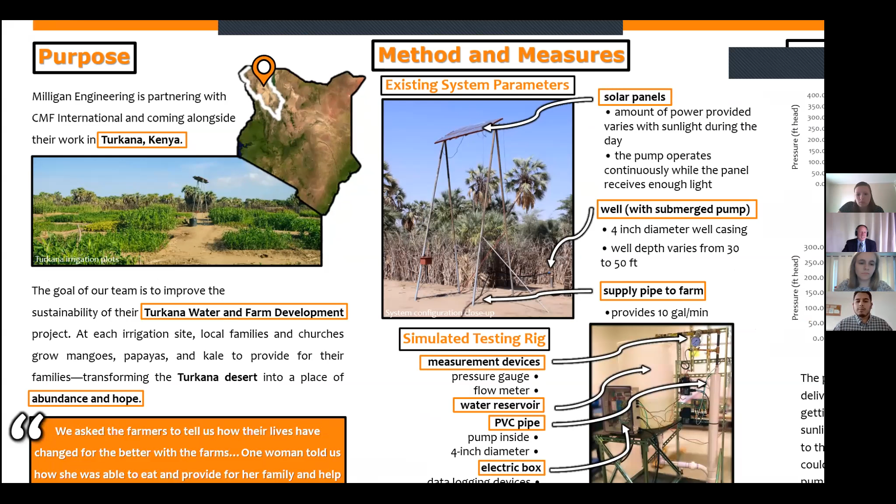CMF International is a global mission team at work in 25 countries. They're creating Christ-centered communities. CMF International's projects are wide-ranging and multidisciplinary. Because of this, it allowed us to implement our engineering studies to help a community in Kenya. Their mission in Turkana, Kenya centers around spreading the gospel by aiding the community in their efforts to maintain a sustainable garden in a region with very little rainfall.

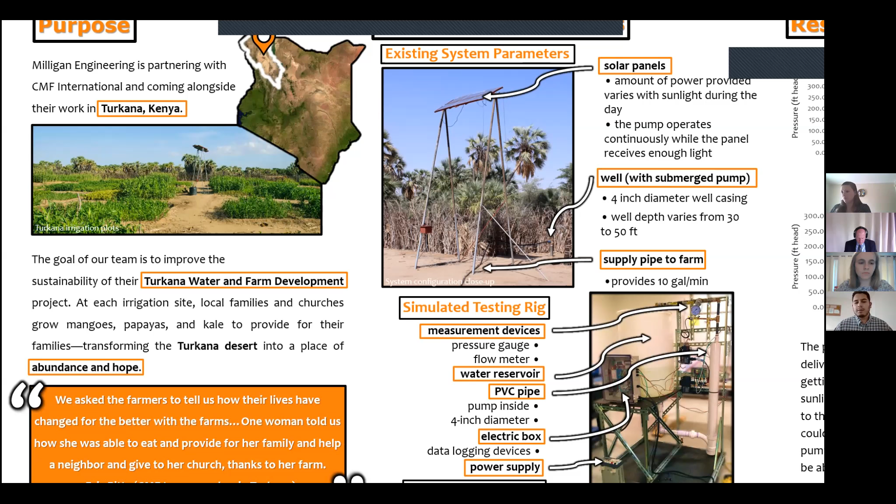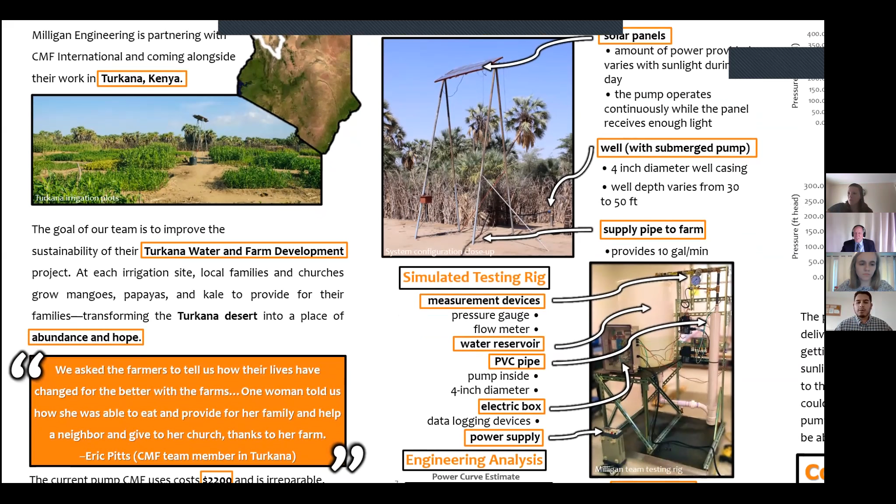At each irrigation site, local families and churches grow vegetables and fruits like mango, papayas, and kale, etc., to provide for their families. The community garden has had a tremendous impact on the people of the community. In our partnership with CMF International, the goal of our team is to improve the sustainability of their Turkana water and farm development project. This goal entails identifying sustainability problems with their current irrigation equipment, proposing a solution, testing the possible solution, and ultimately providing a report to CMF International with data and recommendations.

Their current irrigation system consists of solar panels that power a direct current submersible pump. Gene Morden, CMF International member, brought to our attention that the current system has room for improvement. To start, the current pump used in all Turkana wells costs approximately $2,200 each, which is very expensive in comparison to other pumping options. Also, the current pump is not repairable. Repair parts are not manufactured for the model.

Finally, because of the operating conditions, the intermittent supply of power, and the continuous run times, the pumps in the system have been experiencing a shortened lifespan. It has been documented that approximately 12 pumps out of 100 have experienced a lifespan of less than 10 years. Therefore, our project focuses around providing a pump recommendation that is sustainable, repairable, and financially viable.

For this project, we determined that an alternating current pump is a more affordable option. We found 2 alternating current pumps that could possibly fit the needs of the community, be less expensive at approximately $300 and $500, and perform in their specific irrigation system. The 2 pumps were purchased and tested. The following test criteria were considered in providing a recommendation for CMF International.

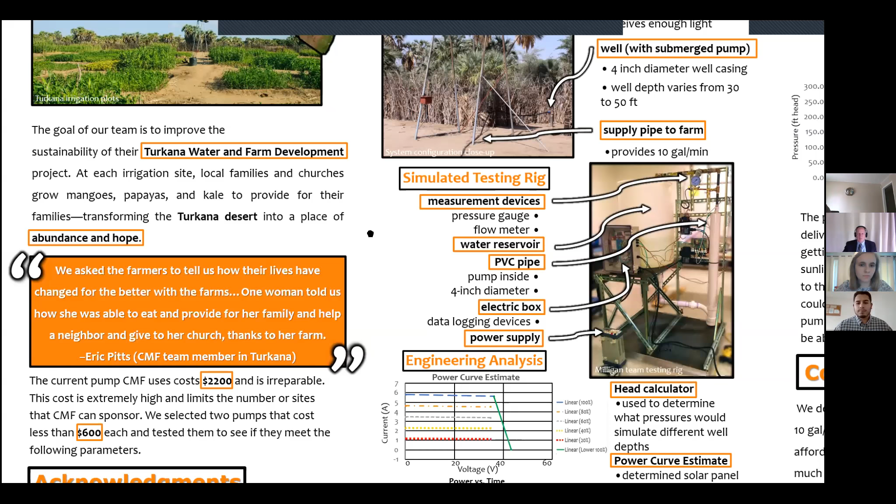In order to determine the pump selection, we first needed to have a full understanding of the current system. The system as installed by CMF contains a solar panel section to provide power for the pump. This usually contains 2 solar panels. The panels are mounted on a stand that allows them to pivot. They're manually adjusted by members of the community throughout the day so that they can track the sun. The amount of power provided varies with the sunlight throughout the day.

One thing CMF mentioned to us is they choose not to utilize a battery storage system, mainly because the cost upfront is significant and it does add some complexity to the system. There is also no power switch on the solar panels, which means that they provide power continuously to the pump as they receive sunlight. This was one area of concern as it shows the pump receiving continuous low power prior to startup in the hours just after sunrise, and then as the sun's going down, again, it's the low power situation.

The pump is contained in a 4-inch well casing. The well depth can vary based on location, but usually it will range from 30 to 50 feet deep. The pump is submerged in the well and provides approximately 10 gallons of water per minute to the farms by pumping through a 1 1/4 inch water line.

The water lines from the pump to the crop also vary in length. We were informed by our CMF contact that the longest length installed was approximately 700 feet. This water is then pumped directly onto the crops. The workers at the crops can allow the water to fill a specific area, and then they're able to just manually move those water lines to ensure sufficient irrigation to different areas of the crop.

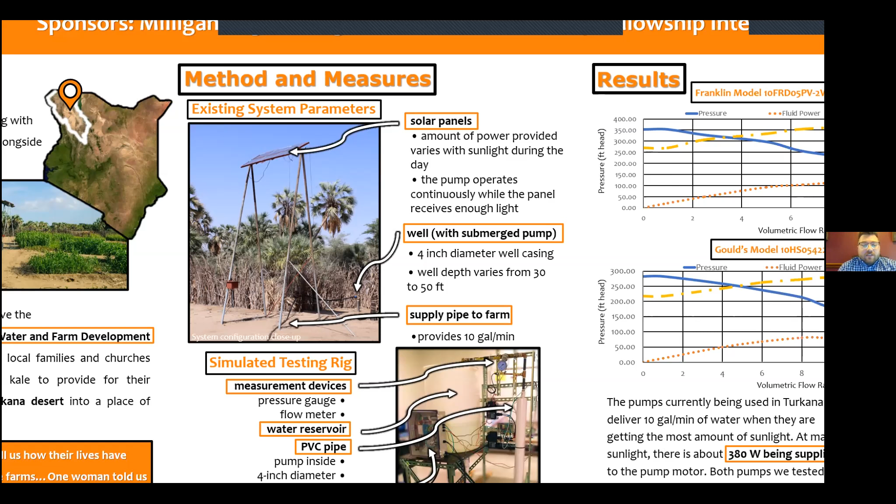For proper measurement data, it required us to assemble a testing rig that would allow us to simulate the characteristics of the current system in operation. A power supply would be utilized in place of the solar panels. This would allow the power provided to the pump to be varied, similar to the power that would be provided by the solar panels as the sun changes position during the day.

Additionally, due to the selection of alternating current pumps rather than the DC pumps that they had previously used, inverters were added to the system that would allow the conversion of DC power provided from the solar panels to AC power, which was required for the pumps. The well casing was modeled using a 4-inch PVC pipe that the pump could be submerged in. This also required a 55-gallon plastic barrel to be used as a water reservoir to ensure the pump had sufficient flow and would not run out of water.

The pump outlet contains a pressure gauge followed by a valve. The valve can be manually adjusted until a desired pressure value is met on the pressure gauge. This allows a simulation of the pressure lost from the system. Parameters such as well depth and pipe length would affect that pressure loss. After the valve, there is a flow meter that allows us to verify the flow after the pressure losses to ensure that the flow is capable of meeting the 10-gallon per minute requirement that the current irrigation system was producing.

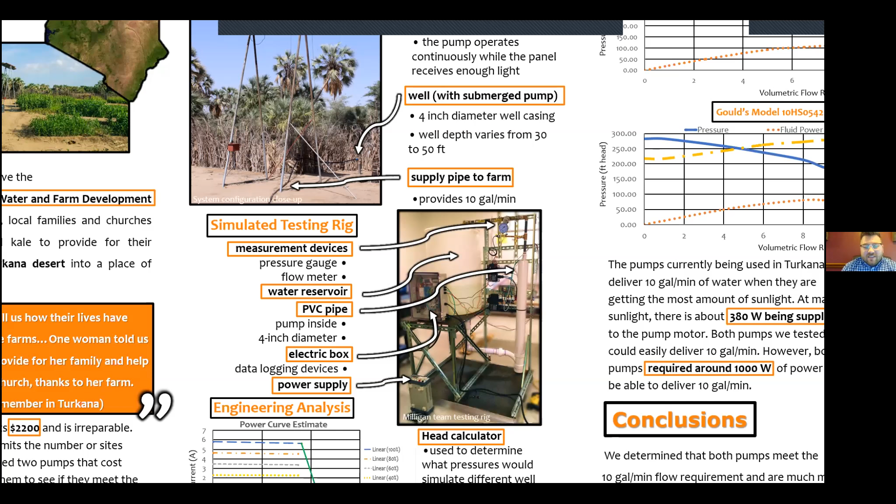This data could be logged on devices located in the electric box, which is attached towards the front of the testing rig. By utilization of this data logging, it allows the parameters to be monitored for a given time to determine that steady state has been reached, and the data could be viewed as reliable.

Next is the engineering analysis. There were multiple things we had to do for that. The first one, more for the mechanical side of the project, was the head calculator. The head calculator represents the pressure loss through the system. It is an Excel calculator that was built to allow the system parameters mentioned previously, such as well depth and pipe length, to be input and the pressure loss of the system to be calculated. This pressure is then what would be used for testing by manually adjusting the valve on the pump outlet of the test rig.

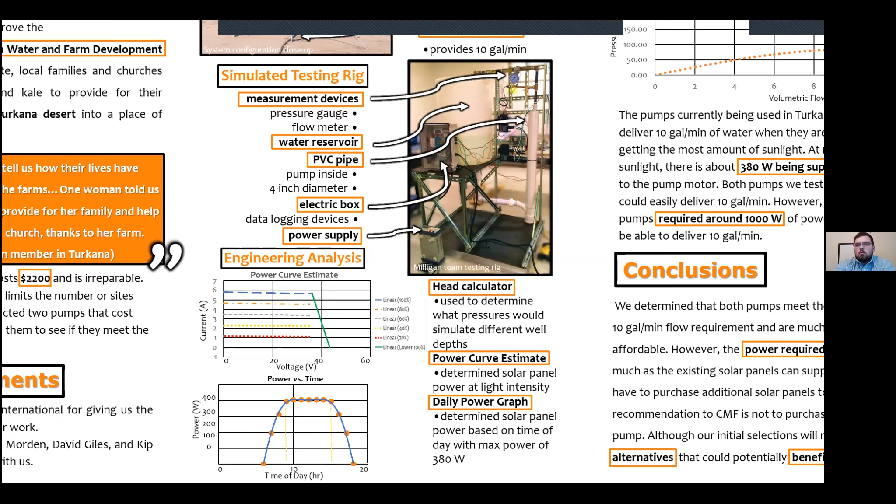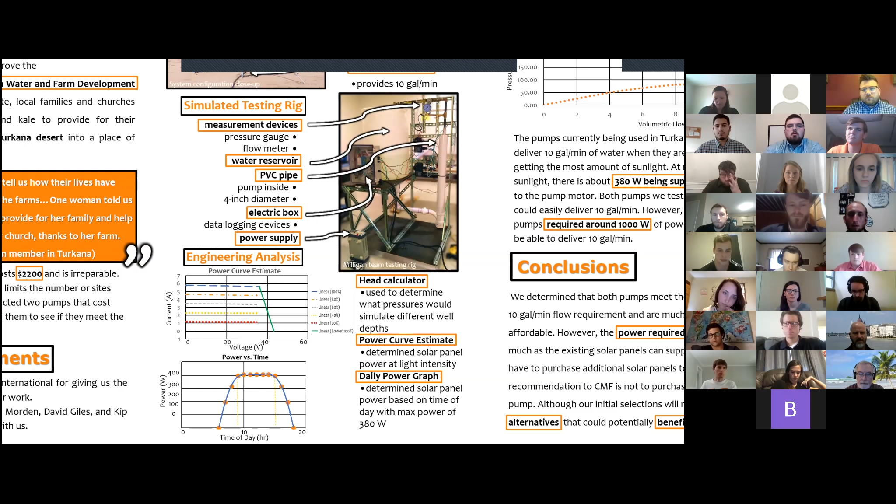Next comes more of the electrical analysis that had to be done. The first is a power curve. A power curve is a graph that shows how the voltage, current, and power change depending on how much sun is seen by the solar panels. This is typically something that is given to you by the manufacturer, but these panels, having come from Kenya, we didn't have much data on them. So we had to create them through analysis and the data we did have. These curves can be used to determine the true power generated throughout the day.

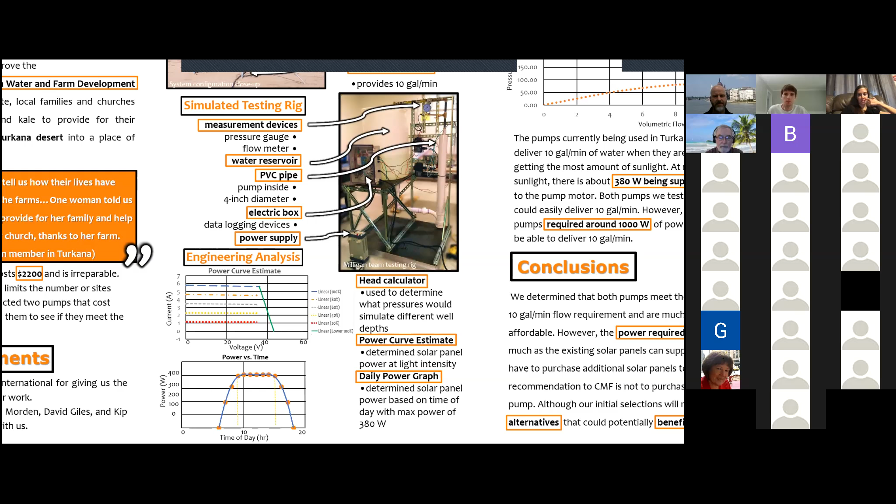The graph on the top left is the power curve estimate, and the different lines on the graph show the different percentages of sunlight on the panel. As you can see, the lower the percent of sunlight, the lower the current and power produced by the panel. So as you go down the graph, the different colors represent less solar irradiance seen by the panels.

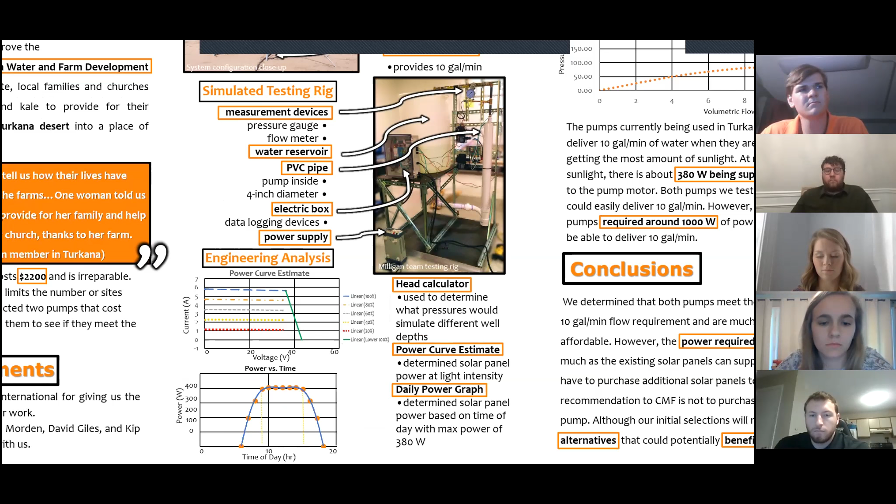The next part of the analysis we did was the power versus time. The power curve estimate gives you just any generic amount of solar irradiation on the panels to give you your power. So what we did is we created a power curve specific to Turkana, Kenya. The power curves give you the way the panels react to the sun.

So in order to get the power versus time, we had to use the latitude of Turkana, Kenya to estimate the position of the sun throughout the day. We used this to determine when the pump should start pumping water and to prevent future startup problems.

The graph shows that the panel starts seeing sunlight around sunrise, which is around 6 a.m. in Turkana, and it takes about 3 hours for the pumps to reach peak power, which is around 380 watts. They see this for roughly 7 hours a day, and then it decreases until sunset.

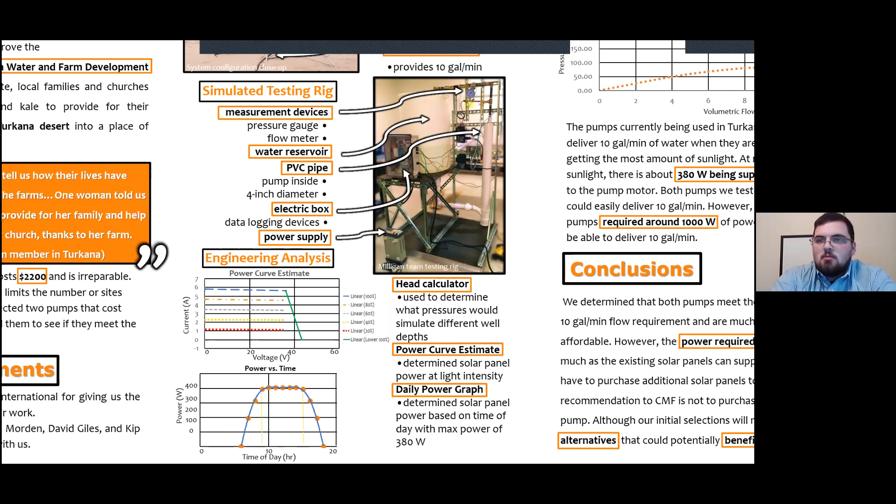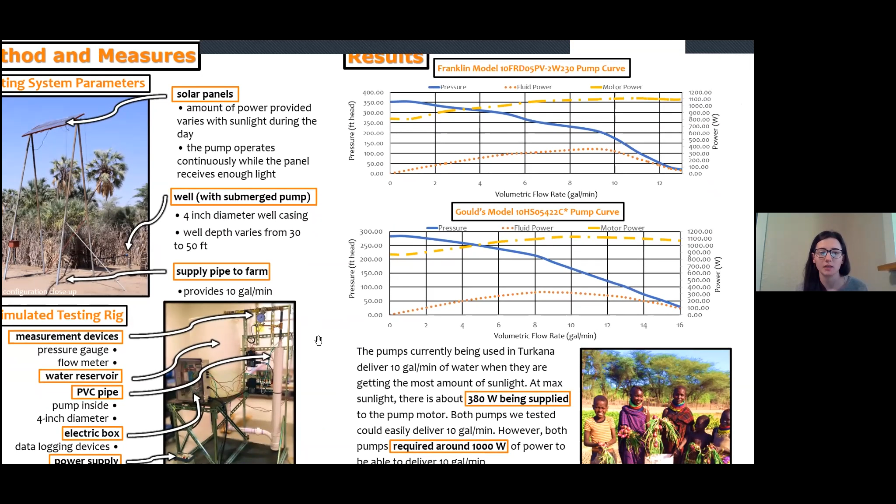So after testing both pumps, we created 2 standard pump curves to better understand the characteristics of each pump. The yellow dotted line along the top of each graph represents the amount of power the pump motors are drawing as the flow rate is increased. The orange dotted lines are the amount of fluid power that can be produced by the pumps as you increase the flow rate. And then the blue lines are a function of pressure and flow rate, and they represent how much flow the pumps can produce depending on the depth of the well that they are placed.

So we first wanted to make sure that for a 30 to 50 foot well, which is typical in Turkana, we'd be able to provide 10 gallons per minute of flow. Both of these pumps easily provided that much flow for much deeper wells, so we were very satisfied with these results. However, each pump required about 1,000 watts of power at almost any well depth and flow rate. This is way more power than the 2 solar panels currently being used in Turkana would be able to provide.

Looking at the graphs, you can see that the yellow dotted line, like I said, shows how much power is required by the pump motors, and the orange dotted line shows how much power is actually turned into fluid power. The difference between these 2 curves shows how much power is lost through motor and pump inefficiencies. The fact that these 2 lines are so far apart tells us that neither of these pumps was very efficient. We would hope to see pumps like this be about 60% efficient, and both of these pumps maxed out at about 30% efficient.

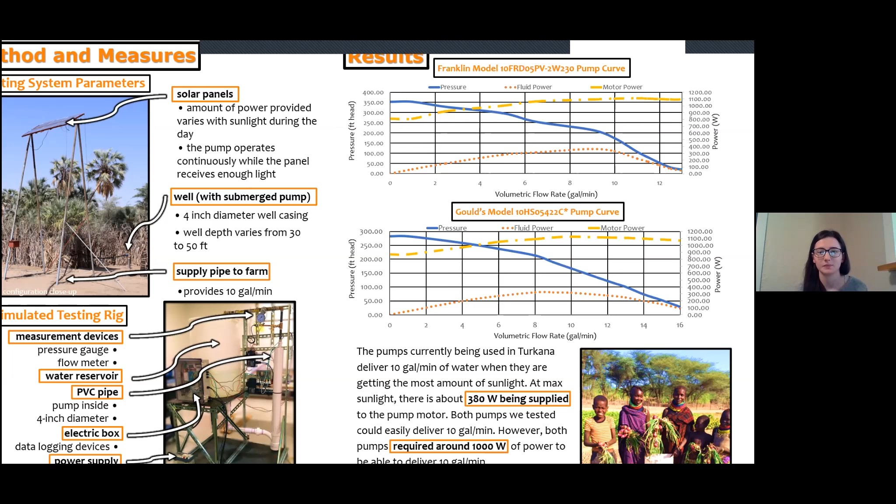So it's evident from the results of our testing that neither of the initial pumps we selected are viable options for CMF's work in Turkana. Although both pumps are much more affordable and they can meet the flow requirement of 10 gallons per minute, they require more than double the power used by the current pump, like Sarah explained. Since the existing panels can only provide 380 watts of power, in order to actually use either of these pumps, CMF would have to purchase additional solar panels for each irrigation site. The cost of these extra panels would effectively cancel out the economic benefits of the lower pump prices. Therefore, our recommendation to CMF is to not purchase either of these pumps.

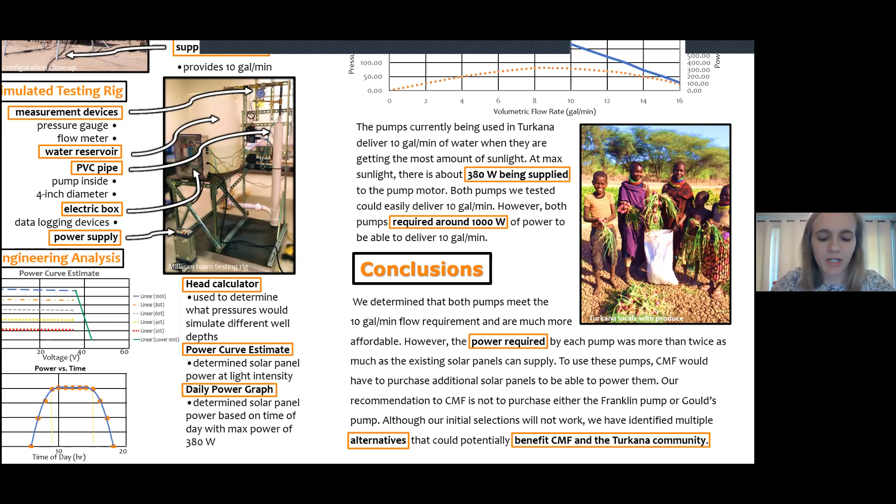However, by testing these pumps, not only did we gain experience with the importance of testing and verification in the process of engineering selection, but also, moving forward in our partnership with CMF, we have a better idea of realistic pump requirements for their systems and have identified multiple alternatives that can benefit CMF's work and help them reach even more people in Turkana.

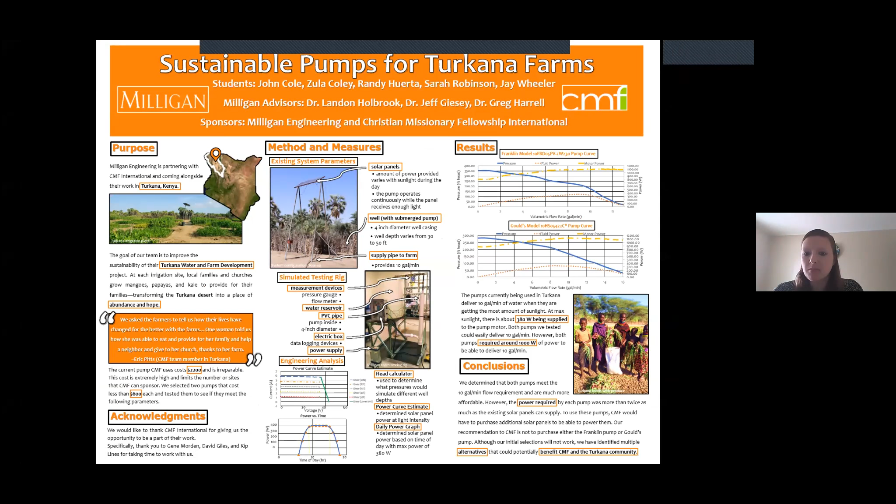Does one have to be trained to use or fix this system, or can you just send a manual with instructions? So the people that are already in Turkana and using these systems are trained in how they work. The only thing that would be different with our system is that since we've included inverters, since we're using an alternating current pump, we would have to write some kind of instructions for them. And then we would also want to include all the manuals that come with the inverters and pumps.

And then we would also be available for any questions that they have. We have connections with multiple CMF members, so they can send us an email and we'd be able to help them in any way we can.

Our second question comes from Drake. Is there any purification with this system?

No, there's not. So none of this water is going to be used for drinking. These pumps are purely to irrigate the crops. So there's no purification aspect for this system.

I have another question. Based on your recommendation of not purchasing either of these two pumps, what is your recommendation, knowing that their current way of doing this isn't very sustainable on many different levels? What should they do?

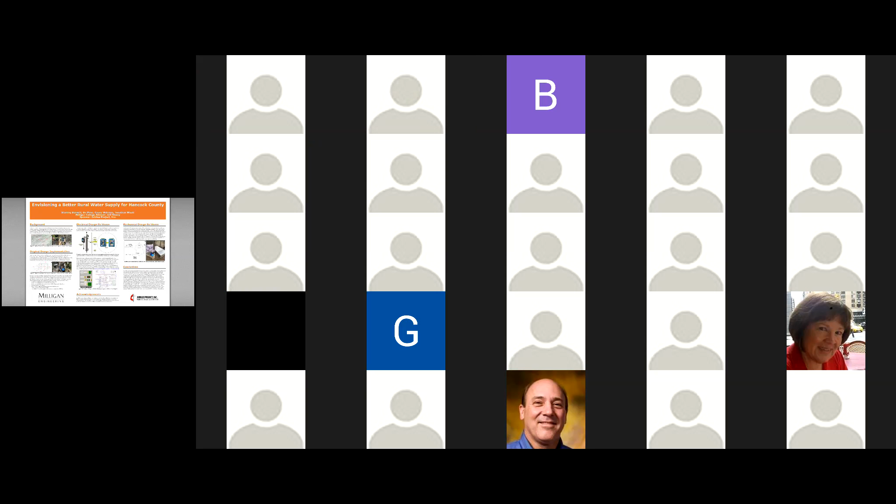Casey Williams and Jonathan Wyatt, under the mentorship of Dr. Jeff Giesey, have been working on this project for the last couple years, and they're going to tell us tonight about their rural water supply solutions for Hancock County. It's all yours, guys.

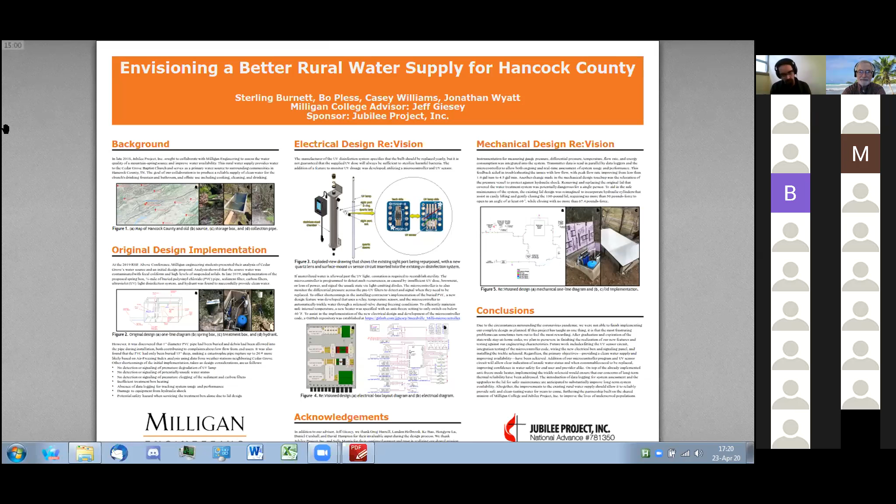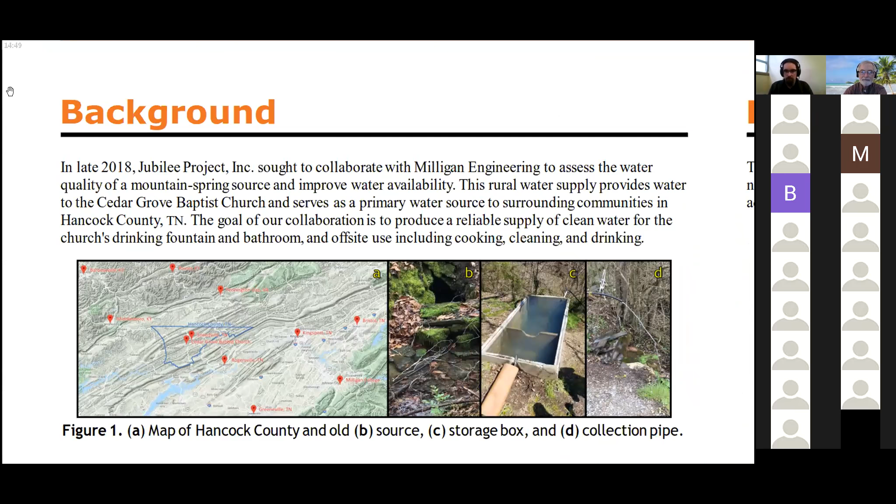Well, good afternoon, everyone. And on behalf of the group, let me thank you all for being here, and congratulate everyone else who's presenting today on a fantastic job. As we mentioned a few minutes ago, the theme of this year's conference is revision. And so we'd like to take an opportunity here to tell you about how we've spent this year using some innovative design to improve an old project.

Hancock County is outlined here in Figure 1A in blue. And for reference, Milligan College is over here about 1.5 hours to the southeast. And all across the county, there are several mountain springs that serve as water sources for the citizens of the region. And one particular spring, which is shown here in Figure 1B, provides water to the Cedar Grove Baptist Church, as well as to surrounding communities.

Originally, water ran downhill from this spring about 1/4 mile, and it was carried by black plastic tubing. It flowed down the hill into a concrete box, which was just outside of the church, and then further downhill before being dispensed beside the nearest road. And Jubilee Project, which is a local ministry organization, partnered with Milligan Engineering in late 2018 to assess the safety and availability of water coming from this source.

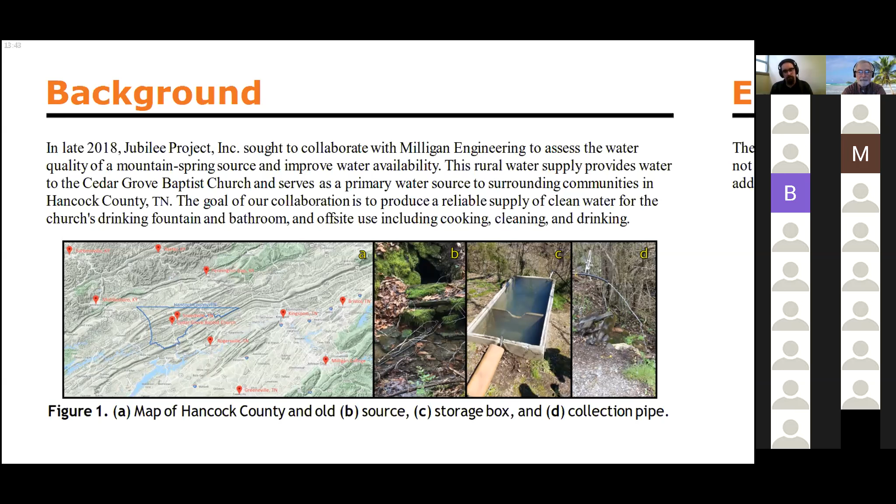From that analysis, it was determined that the water was contaminated with fecal coliforms and also contained high levels of suspended solids, which are both conditions that make water unsafe to drink. In addition to this, the piping that was used to transmit the water was subject to frequent freezing during the winter months, which made the supply of water very, very unreliable.

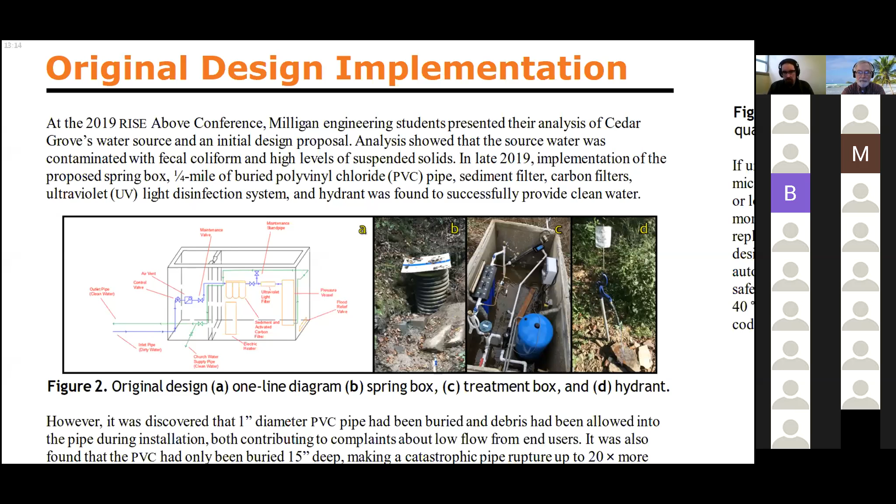By the end of 2019, a design had been developed and implemented that you see here, and it fixed these issues. Figure 2B is a cover for the spring itself that prevents contamination at the source. Sediment and activated carbon filters were implemented to remove solids. A UV light system sanitized the water to remove microbiological growth, and burial of a 1 1/4 inch PVC pipe with a freeze-proof hydrant attached at the distribution point was able to solve the issue of freezing.

However, the design ran into some problems rather quickly. It was discovered that 1-inch PVC pipe had been buried rather than the specified 1 1/4, and this limited the flow capacity of the system fairly significantly. We also found that the pipe was buried to a depth of only 15 inches instead of the originally intended 30.

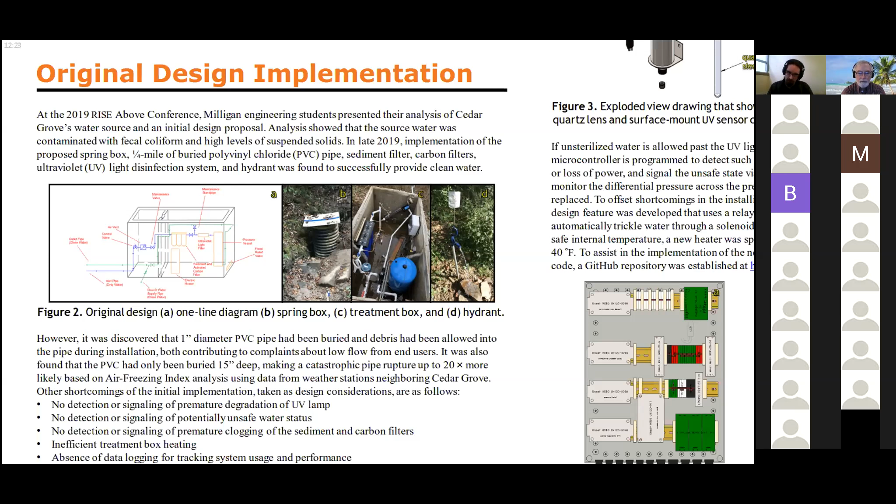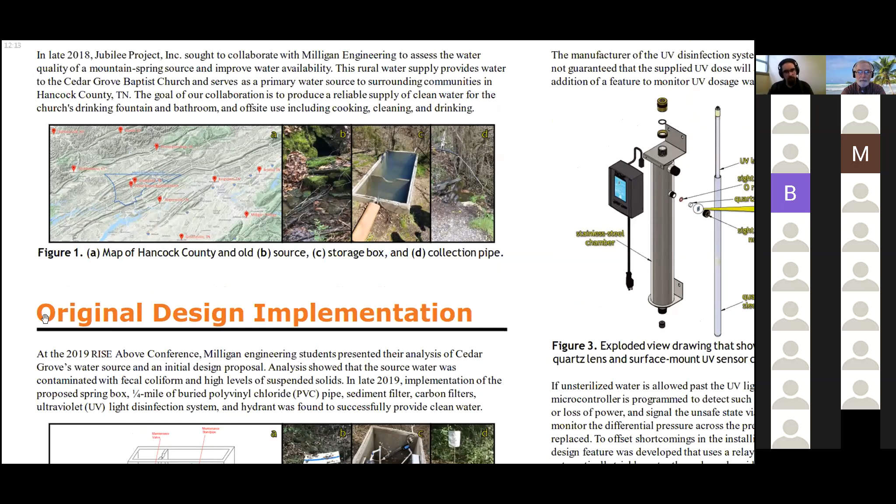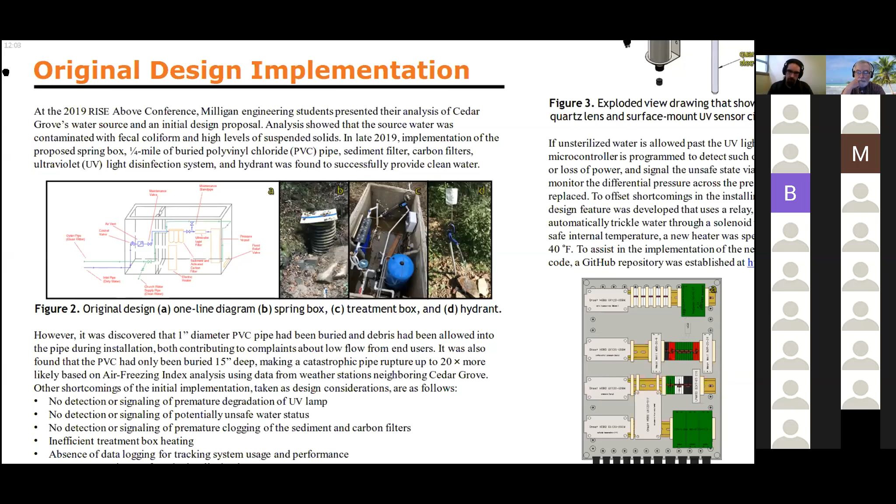And after conducting an air freezing index analysis based on weather station data from the surrounding area, which you can see here in figure 1A if we scroll up just a little bit. So all of these red points are weather stations that we use to compare to Sneedville. And from this analysis, we determined that the burial depth being half of what it originally was made a catastrophic rupture due to freezing in the system up to 20 times more likely. So in other words, we were taken from well over a 100-year freeze with the original design to just a 5 to 10-year freeze.

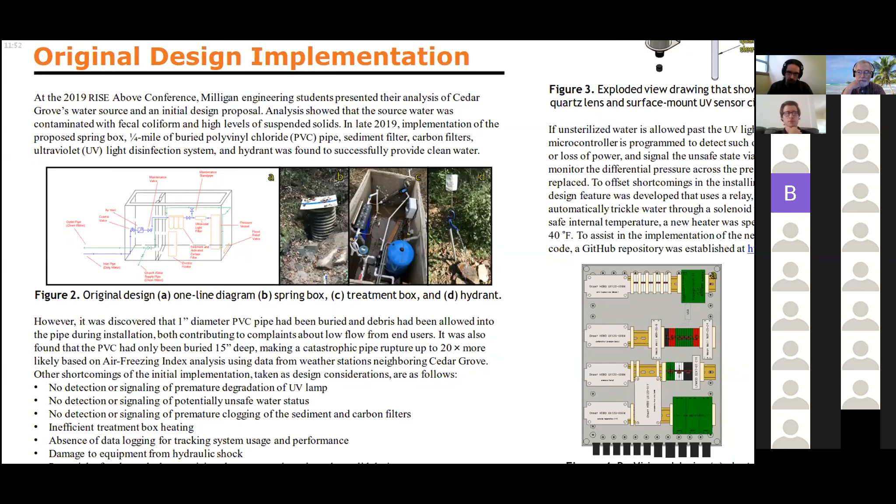And in addition to all of these, there were several more areas for improvement. The original design didn't offer us a way to detect if the system was powered or if our UV light and particulate filters were operating as intended or if they needed to be replaced. The interior of the concrete box, which is here in figure C, it had been repurposed as a home for our treatment equipment, and it had insufficient heating for winter temperatures, so the piping inside of the box was susceptible to freezing.

We had also incorporated a pressure vessel in the original design, both for water storage and as a means to protect our system from sudden pressure surges. And upon further analysis, we determined that this was located incorrectly within the system and was going to need to be repositioned. We lacked a method that was reliable for getting performance and usage data that would allow us to know how well the system was doing its job and how much people in the community were using the system to get water.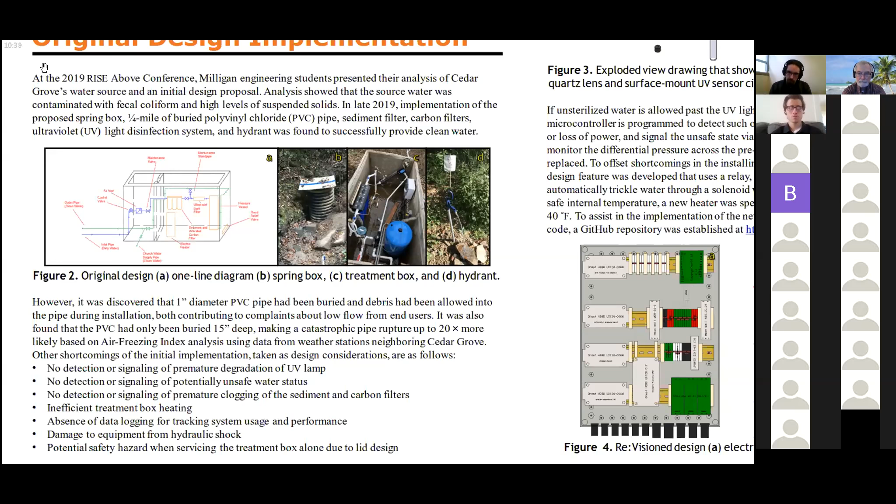And lastly, opening the lid on the concrete box to get access to the equipment, to do maintenance or to add new equipment, became a 2 or 3 person job to move the lid just because of the weight and the shape of the lid itself. And so we knew that the core of our design was strong, but we also felt really strongly that we could do a lot better. And that was what motivated our work this year. And so with that said, we'd like to tell you how we've been able to improve the system so far.

Okay, I'm just going to dive right into the electrical, so buckle up. The carbon filters and sediment filter and UV lamp all need to be replaced periodically, which you do according to manufacturer recommendation. And this doesn't guarantee that those pieces of equipment are going to be providing clean water for their entire lifetime. It's just kind of an average lifetime that they found. So one of our toughest challenges was to ensure that we always have safe water for the entire lifetime of the consumables. And so we tackled the issue by implementing a UV sensor and a microcontroller.

So we use the UV sensor to monitor the UV dosage in real time and then signal whenever it's below a certain threshold, indicating that it needs to be replaced. So we could end up increasing the lifetime of the UV lamps, but it'll also make sure that if they ever go bad early, that we'll be sure to know.

As you can see in figure 3, we were able to implement this by repurposing the existing sight port on the UV system, which is on the side. And normally the sight port just allows you to see that the UV lamp is operating, and it has a UV blocking lens. So by replacing that with a quartz lens that allows the UV through, the light can get to the sensor and we can tell what type of dosage the water is receiving.

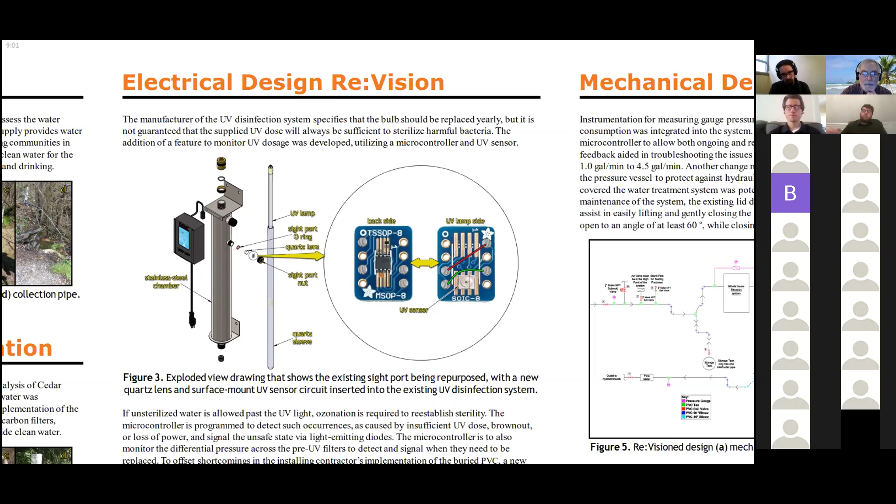So due to our choice of using the UV for disinfection, there's no residual disinfecting agent that's left in the water. And so we have to keep the UV light on all the time. And if there's ever unsafe water that gets past the UV light, there's no way to treat it before the end user gets it. And that bacteria will also stick to the pipes and grow over time.

So we decided it was necessary to supplement the disinfection by using an ozone generator, and ozone can also kill bacteria. And so the ozone will sterilize the downstream pipe, and so long as unsafe water doesn't re-enter, then it should be a safe water system. But the problem is that there's several different ways that the unsafe water could get past the UV, including if there was insufficient UV dose before the light was replaced, if there was a brownout, or if there's a total loss of power.

So the microcontroller helps to implement and signal when one of these situations arises. We also use the microcontroller to monitor the differential pressure across the carbon filters and sediment filters, which helps us know when they need to be replaced instead of just doing it every 6 months.

Another aspect we looked at electrically was the insufficient bury depth of the pipe, which drastically increased the risk of freezing. Our solution was to implement a solenoid valve that can open or close based on temperature sensor readings from the microcontroller, so we can auto-trickle water through the system, which drastically improves tolerance to prolonged freezing temperatures.

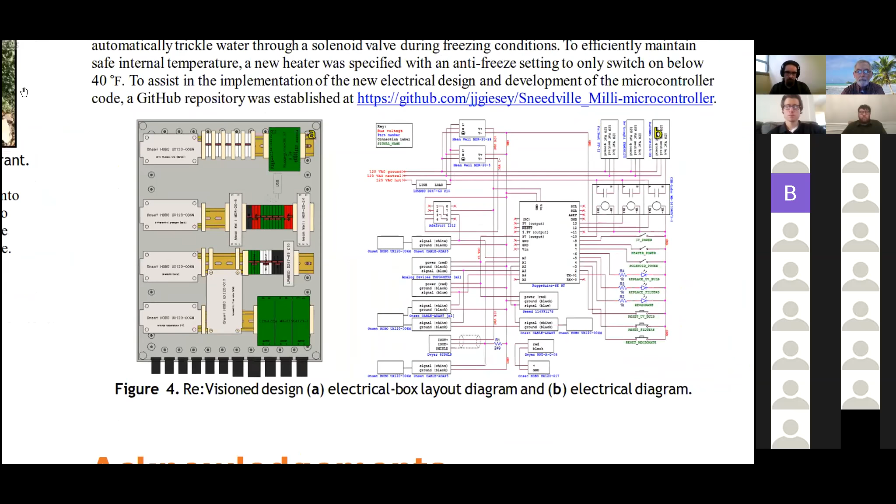And lastly, to assist in implementing the new electrical design and developing the microcontroller code, I made a GitHub repository to establish these diagrams so they can be maintained and improved in the future. It also helps to understand what's going on in the system, because as you can see, they're pretty complicated diagrams that require a lot of explanation.

So there's a lot of crossover between mechanical and electrical design aspects. For instance, the instruments that monitor mechanical design performance also read into our microcontroller and make decisions on what our system is going to do based on that. I'd like to hand over the reins to Sterling to continue discussing the mechanical design considerations.

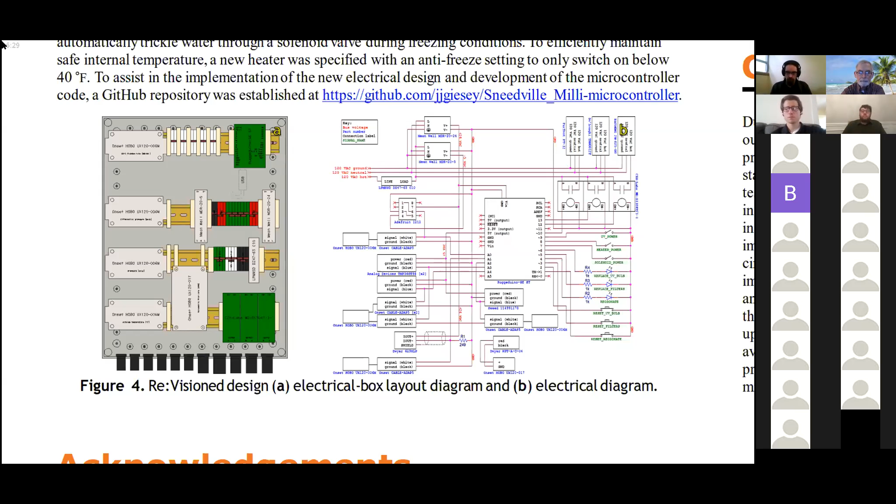There we go. All right.

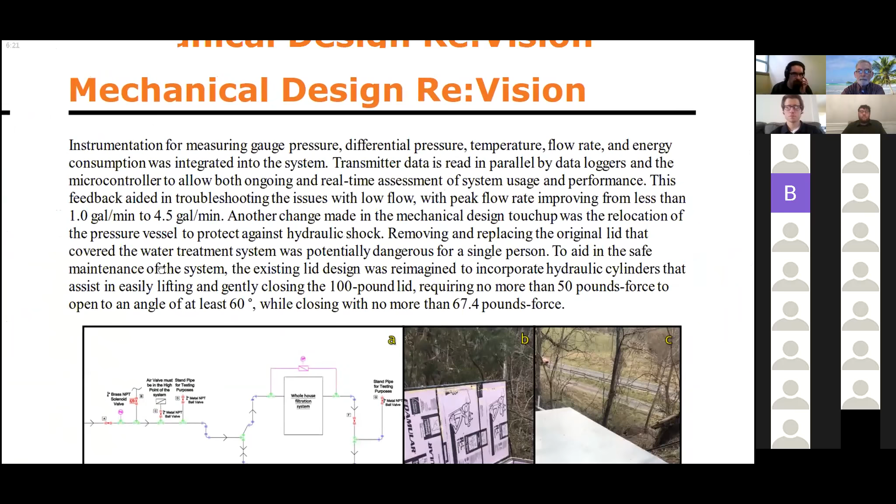Thanks, Giesey. When it came to revisioning the mechanical side of this project, we added many instruments to read and collect data. A pressure gauge was used to track the pressure of the water within the system. We used a differential pressure gauge to detect pressure drop across the large debris and carbon filters to ensure they're working properly all the time.

And we also used a flow rate reader, which is currently being used right now to track the system's water output and usage. There's also a couple other instruments being used to track the amount of energy used in the system as well.

So during this project, there were two pre-existing issues that Bo kind of hit on. One came in the form of a large boulder that had pinched and cracked the line near the spring box after it was placed on top of the PVC line. So after breaking up and removing this some 500-odd pound boulder, we replaced the line at that location.

And then after that, we found there were rocks within the line causing a blockage, in one of the PVC couplings that was underground, only 15 inches. So after removing these two issues, we were able to greatly increase the flow rate from about 1 gallon a minute to 4.5 gallons a minute.

With this new information, the storage tank wasn't really needed for storage so much, but it was still very important to use as a pressure vessel to protect the UV light from water hammer coming from the upstream line in case of sudden water stop at the outlet. So it was repurposed and moved downstream, before the UV light.

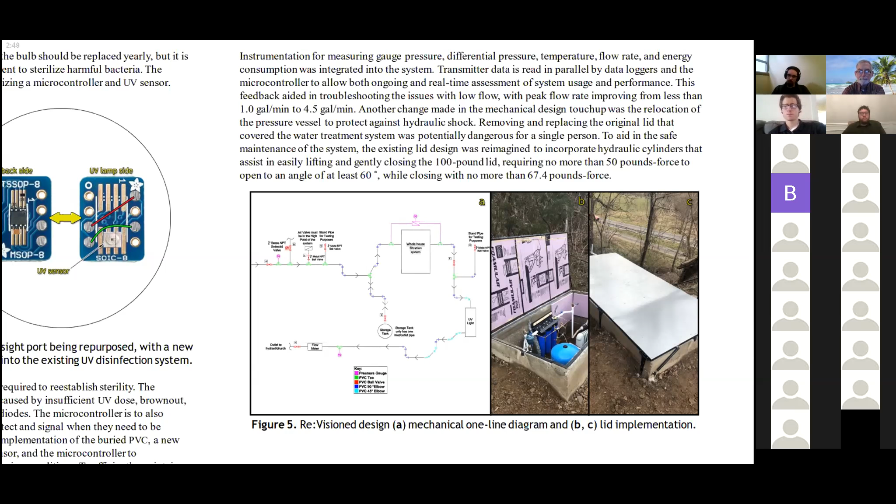And then lastly, the angle of the lid — when it came to the gas struts, we wanted about 60 degrees or so so that our tallest member could stand up in the box and work on the instruments and adjust things as needed. But during the implementation of the lid, we were able to open it all the way to 90 degrees, which gave us a lot more room to work in that space to fix or adjust things. So with that, I'll let Jonathan take care of the conclusions.

All right, thank you, Sterling. So based on everything my colleagues have mentioned today, we ran into our fair share of complications with this project. Anything that could have gone wrong did, or at least it felt that way. Some of these were self-inflicted, while others were out of our control.

Regardless, all of those complications came with their own teaching aspects and moments of humility. These taught us that even the most frustrating problems can be the most rewarding. Even now, the circumstances surrounding the coronavirus pandemic have caused us not to be able to finish implementing our complete design as planned. However, the primary objectives of providing clean water supply and improving availability have been achieved.

For our future work, it includes fitting the UV sensor circuit, integration of a microcontroller code, wiring the new electrical box and signaling panel, along with installation of the trickle solenoid.

The addition of the UV sensor and microcontroller will allow for a clear indication of when the water is reaching unsafe drinking conditions, as well as when consumables such as the filters and the UV light itself need to be replaced. These design additions will allow for improved confidence in water safety for not only the provider, but also the end user.

The implementation of the trickle solenoid, in conjunction with the anti-freeze heater that is already installed, would ensure that our concerns of long-term thermal reliability have been addressed.

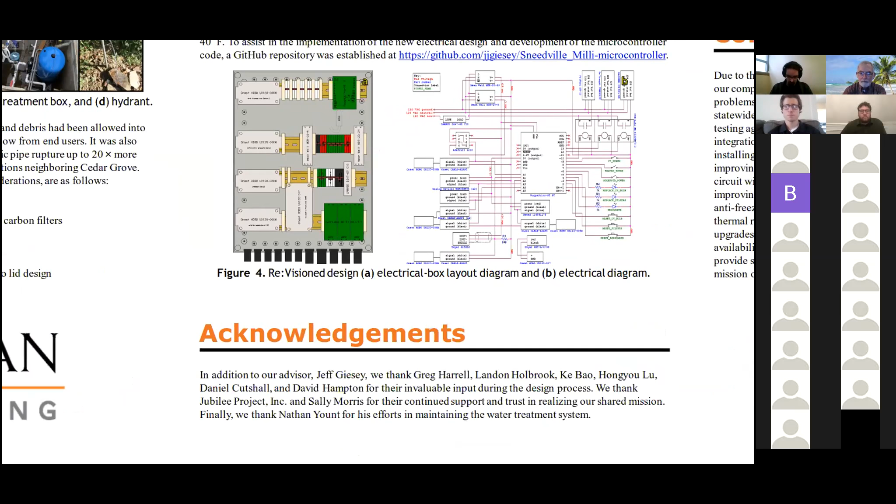Thank you guys very much. I have one comment from Dr. Carolyn Carter here that I'll read off to you. She says, Milton and I were involved with hosting the regional CTE, Career and Technology Education Teachers, on campus on March 12th. One of those faculty members was from Hancock County. Her church was the church where this team did their work. She was beyond ecstatic with the work this team did and was very appreciative of their work.

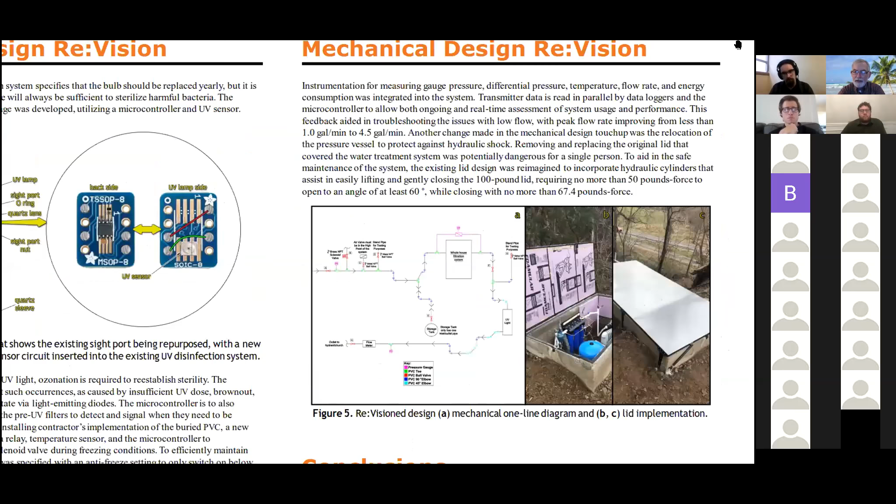I know it's a long distance where this pipe is being run down to the supply. Is it feasible, in your opinion, to cover the pipe over? I know digging it out, you don't know whether there are rocks underneath. And although you didn't say it, it was a contractor issue, it wasn't your fault on this. Would it be feasible to cover it over or insulate it in some way to lessen the likelihood of freezing?

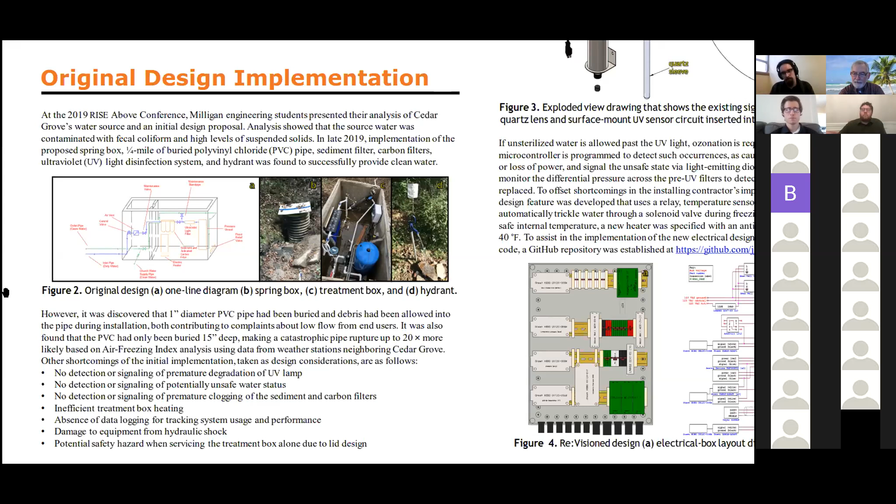I would say that in theory, I think it would be feasible. In practice, it would be a very, very big job. The distance is not so much the issue as it is the terrain. You can sort of see from the first picture of the spring, it's not the sort of place you could drive to if you didn't have four-wheel drive, or something rugged to get back into that wooded section. So in the future, if that burial depth presents serious issues, and if the powers that be decide they'd rather pursue that than attempting to rebury the pipe deeper, I think it's possible, but ultimately the financial cost and labor involved, just because of where it's located, would be fairly substantial.

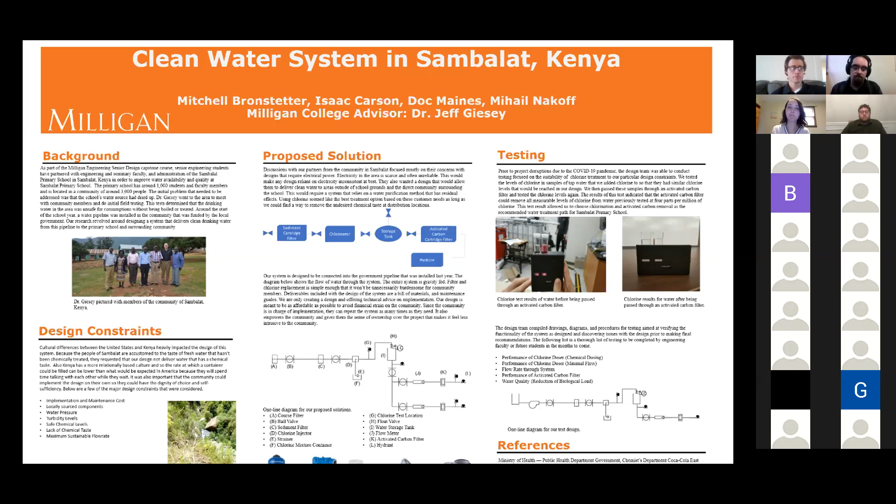First, I want to say thank you and say great job to the first two projects. It's been really cool working alongside them and seeing all the progress that they've made. I want to also thank everyone for taking the time out of their day to come and listen and see the work that we've done this year.

For our senior design project, Isaac, Doc, Mihail, and myself have been working on a clean water system in Sambalat, Kenya. For some background information...

Last year, Dr. Yola reached out to Dr. Giesey about possibly helping out with a water system in Kenya. Dr. Giesey took a trip to Sambalat, Kenya, in the picture below, and found out that the water source had dried up. This was used by the primary school there, which had about 1,000 students and faculty members, and the school is also located in a community of around 3,000 people. At the beginning of the school year, a new locally funded pipeline was introduced to the community.

This pipeline would provide water to the community, but during field testing, it showed that the water was contaminated. The water had microbiological contamination in it. The water from the source had to be boiled before consumption, and this can be an exhausting process for lots of members of the community. So oftentimes people won't boil the water and will just drink it from the source. This can cause sickness to children and adults. So having clean water here is something that can really be overlooked and something we really wanted to help with.

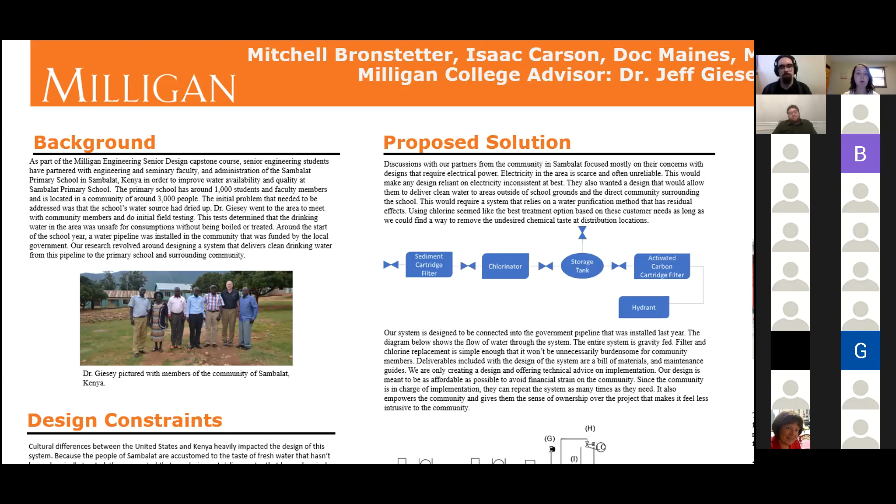As Milligan engineering students, we partnered with Milligan and some seminary faculty and the administration of the Sambalat Primary School to help improve the water availability and quality. In our research, it revolved around designing a system that delivers clean drinking water from the pipeline to the primary school and surrounding community. Doc is going to explain the design constraints we had.

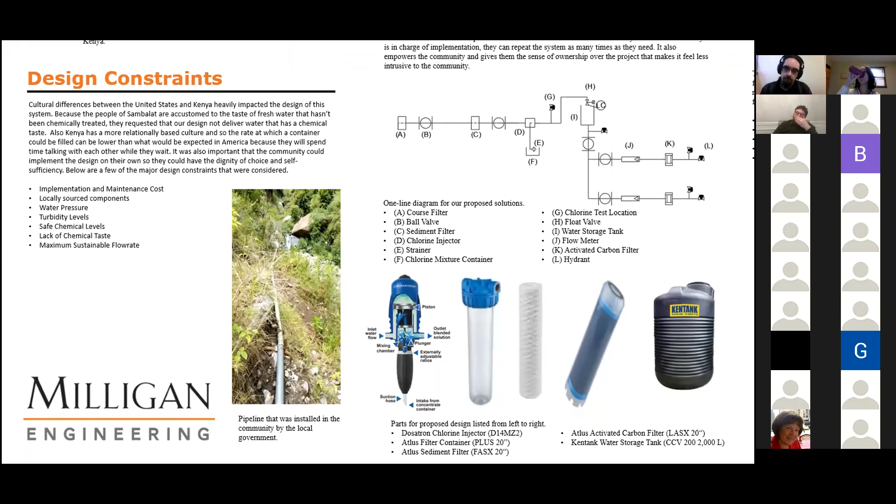Thanks, Mitch. I'd like to take a moment to talk about some of the design constraints and also cultural considerations that became paramount within this project. Along with common design considerations such as safety, cost, and the amount of water provided, a few more subtle considerations became major constraints within the project.

Because of cultural differences between American and Kenyan society, two major cultural considerations played a large role in project decisions. Because the community was accustomed to natural spring water, they had requested that our design would not add an unpleasant chemical taste. Also, our design was shaped by the hope that the community of Sambalat could implement our design and recommendations without outside assistance. In this, they would have the dignity of choice and self-sufficiency.

Other design considerations focused on meeting this goal in a sustainable way, and the project also being independently feasible by the community.

Some of the other design constraints present within the project included keeping implementation and maintenance costs low, making sure that as much as possible the components within the system were locally available, maintaining enough water and flow rate to meet the needs of the school, and also meeting safety regulations that dealt with turbidity, chemical presence in the water, and microbiological presence within the water. In these, we strove to meet those standards and ensure that the water was clean.

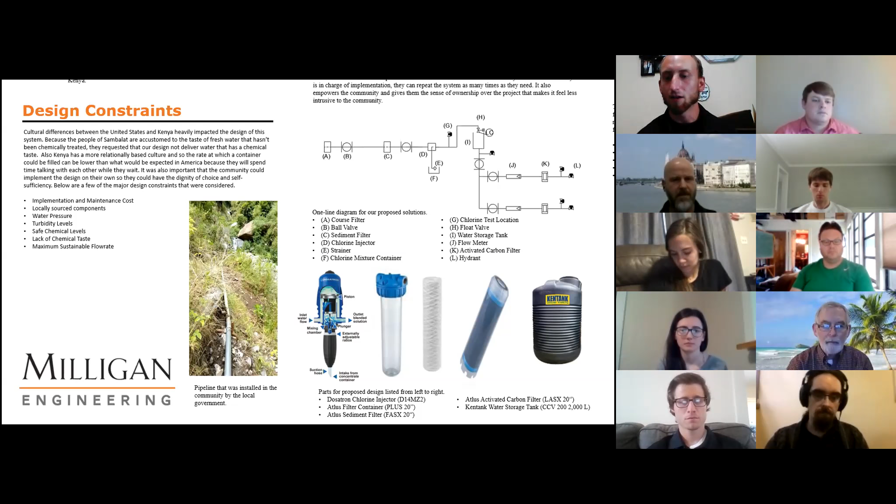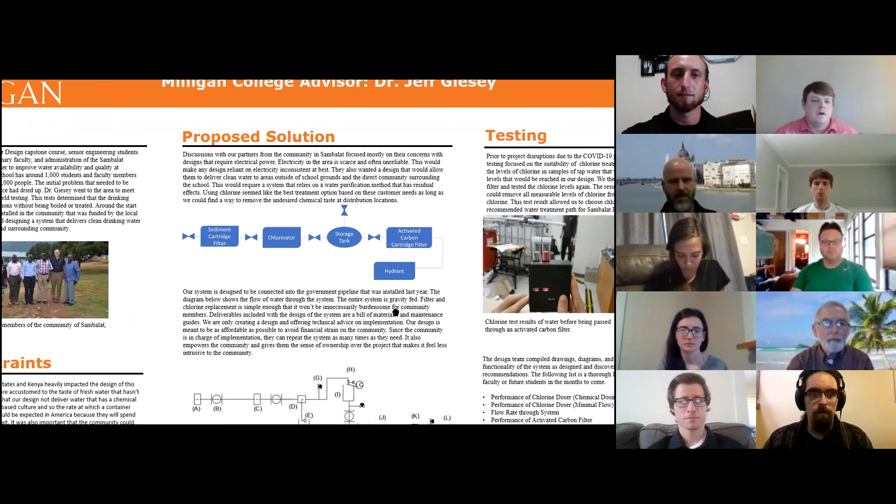With all that being said, I would like to turn it over to Mihail to talk about their proposed solution to the problem. When talking with our partners in Sambalat, Kenya, there were concerns about any system that was reliant on electricity. The reliability of the electricity in that area is low, and solar panels, especially with batteries, are very expensive. So that guided us towards a completely gravity-fed system.

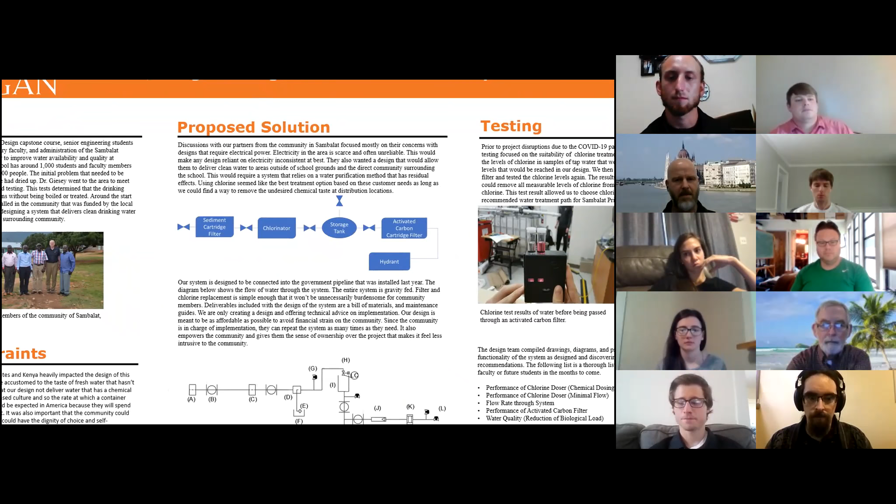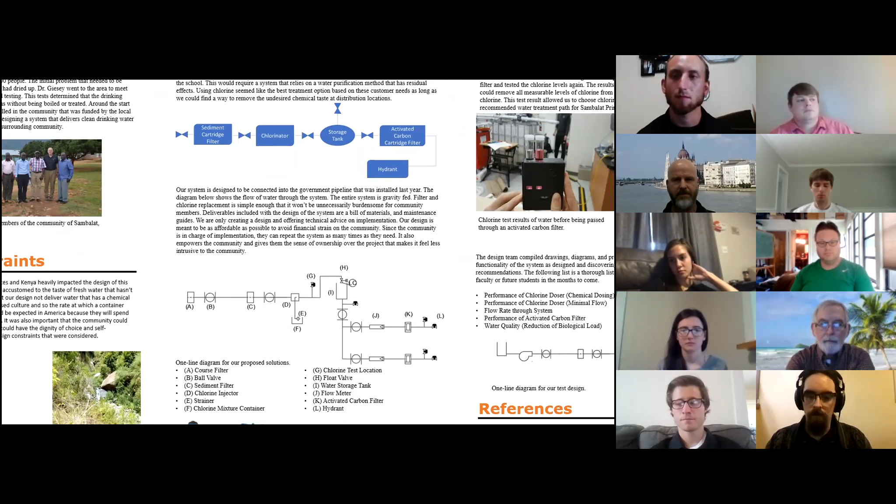Our system first has a coarse filter and then a sediment filter, which removes the particulates. That sediment filter is actually a spool of string, which filters those out and uses the same container as the other filter later in the system.

We decided to use the chlorine to kill the microbiological contamination. So because we wanted to keep away from electrical power, we were able to find a dosing system that used the energy from the flowing water to pump the chlorine in the right ratios. So the water then flows into a tank that is sized such that the water sits there long enough for the chlorine to take effect.

The water then flows out of that, and because of the community's concerns about the chlorine taste, we have included 2 activated carbon filters, which are able to remove the chlorine from that. We included a flow meter in order to determine when those filters need to be replaced. And once it's gone through the system, it should be easy to distribute to the school and the community.

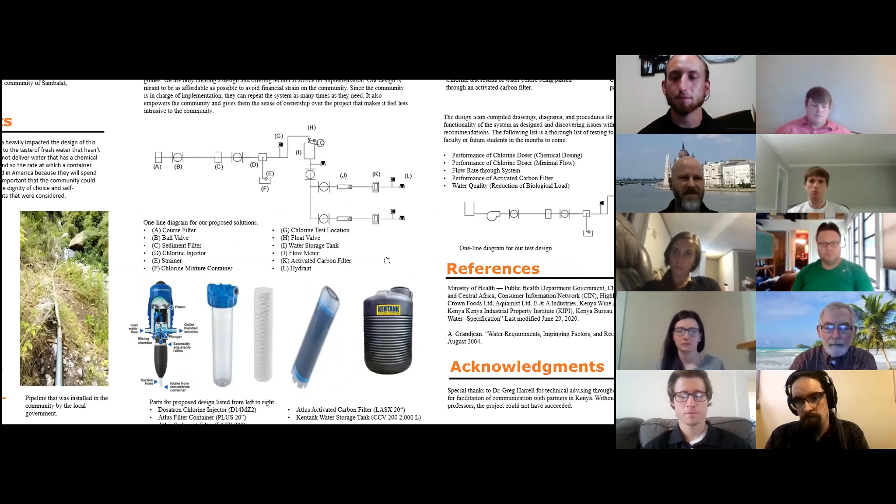So I'm going to talk about the testing that we were able to do on the system. Most of the testing we were able to do focused on chemical levels that we expected to see in different parts of the system. And mostly we were looking to see how much of the chlorine activated carbon filters would be able to remove. Chlorine is something that almost all activated carbon filters can remove, but very few of them give you the data of exactly how much it removes. And we wanted to remove enough that it wouldn't be able to be tasted at delivery points.

So to do this, we took samples of tap water and added chlorine to get to the levels we were expecting to see in our design, which is around 4 parts per million, because that's what is considered normal for disinfecting water like this. And then after we added it, we measured it to see that it was close to what we were expecting, and we ran it through an activated carbon filter, and then measured it again to see how much was removed. And starting at around 3.5 parts per million, when we added the chlorine, it removed enough that we couldn't even measure it.

Down here you see the results. On the left is before it ran through the activated carbon filter. In the tests, basically, the darker the color is, the higher the concentration of chlorine is. And then on the right is what it looked like after running through the activated carbon filter. And that was so clear that it was more clear than the lowest amount it can measure, which was 0.1 parts per million. So it removed basically 99% of the chlorine that was in the water. So that was a good proof of concept that removing chlorine would work well in this situation at removing the chemical taste.

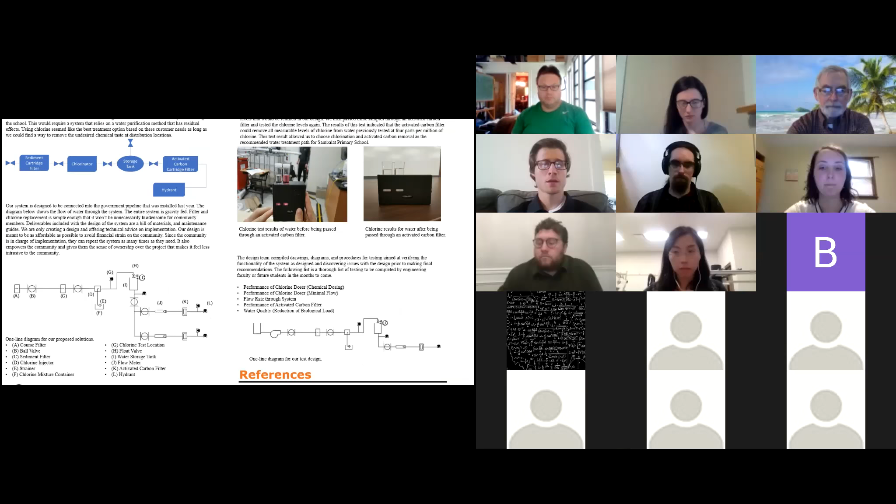And then the last one would be water quality, just to ensure that after it's sat the amount of time it needs to, it has disinfected the water, and now you don't have microbiological contaminants that would cause people to get sick. Below are the references that we use to determine our parts per million of chlorine in our design. Those come from the World Health Organization and the Kenyan Ministry of Health. And both of those agree that 5 parts per million is kind of the maximum that's suggested. It also talks about the maximum that can be tasted, while the minimum that can be tasted is about 0.3 parts per million. So that's what we're looking for at delivery.

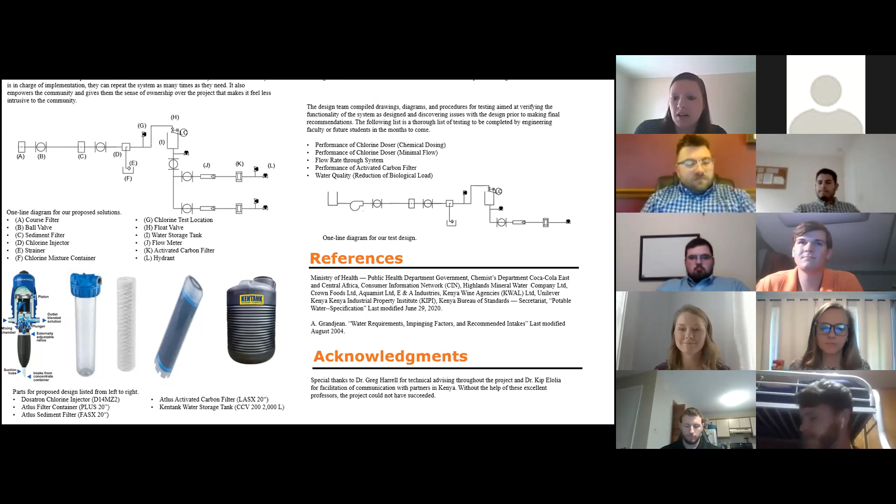Since nobody else is asking questions, I guess I will. You guys talked at the very beginning about this as being something that you hoped a lot of the materials could come from a place where they would be able to access them easily. What's your analysis of these filters and how easy are they going to be for these people to access? So the specific filters we picked out in this proposal are available from a Kenyan manufacturer, Davis and Shirtliff. Specifically, they're headquartered in Nairobi, Kenya. And they also have smaller satellite sites that are within a few hours drive of this area. And the tank also comes from a Kenyan producer, and we checked that they delivered to this particular part of Kenya that Sambalat is located in.

Awesome. Any other questions? Okay, I have another one. The chlorine that you used in your testing, did you just use straight pool chlorine? Bleach, actually. So not actually pure chlorine. No, a mixture. Okay.

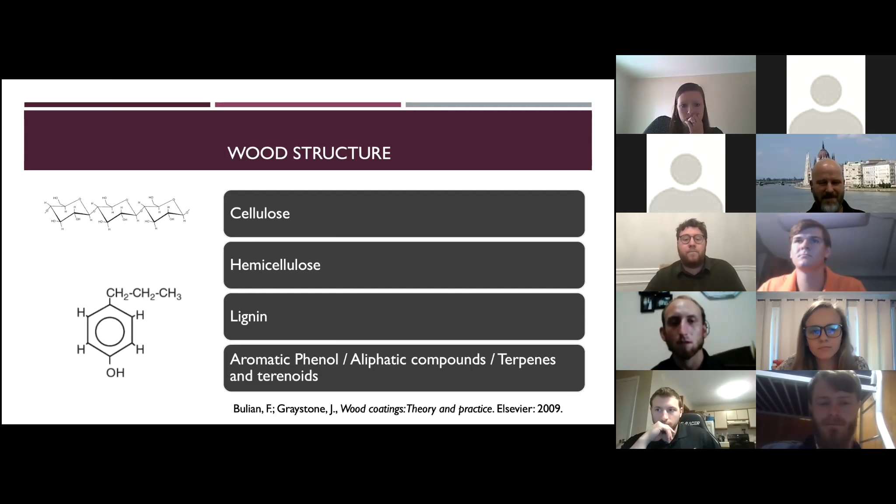So a kind of introduction to this is preservation of wood. So the preservation of wood has been around for a very long time. It's been archived as using different dirts, different natural materials to try to find a way to preserve wood that we need to preserve to keep things in structure and to keep things in balance.

Common wood coatings include lacquer, shellac, polyurethane, varnish oils, and wax. So what coating does is it helps protect the wood. It helps protect the wood from insects, fungus, water, and fire damage. And so a lot of these things are the common types of materials that you would see in interior wood coatings. So there's a difference between treatment of wood and coating of wood.

Treatment of wood happens during the drying process of wood. So as soon as the wood is cut fresh from the timber, it is treated with a certain chemical to help maintain a water resistance level fresh off of the tree. And coating is something that you add on top of the treated wood to help maintain the balance between the treated wood and the coated material.

So one of the common types of treatment of wood is the acetylation of wood. And what happens is you get an acetic anhydride and you add the OH bond of the cellulose and you attach it on. So what happens is there's a shift of electrons that go on to where the acetylated wood is now a hydrophobic material, which gains water resistance, and it creates acetic acid, which can easily be eliminated through the wood process, and it doesn't harm any of the other materials that are found in wood.

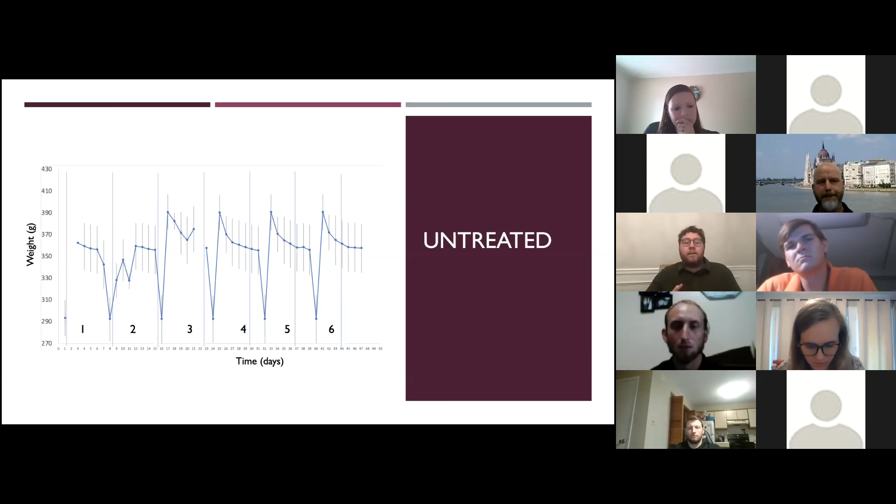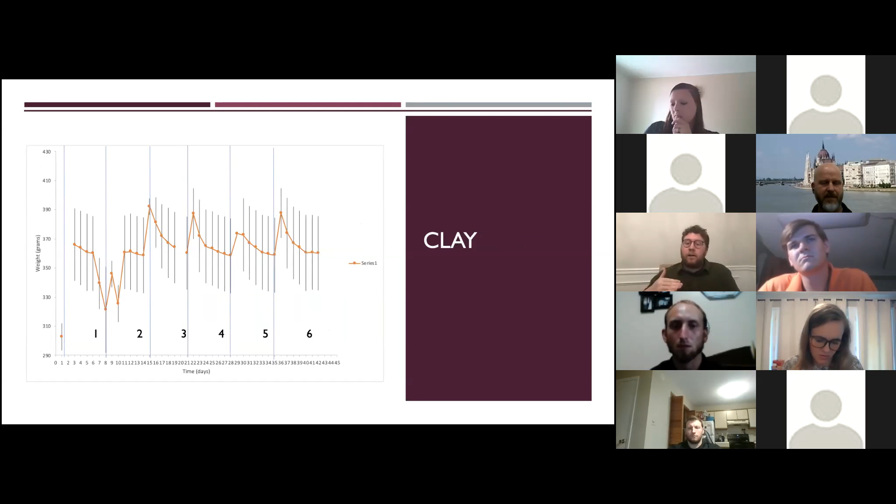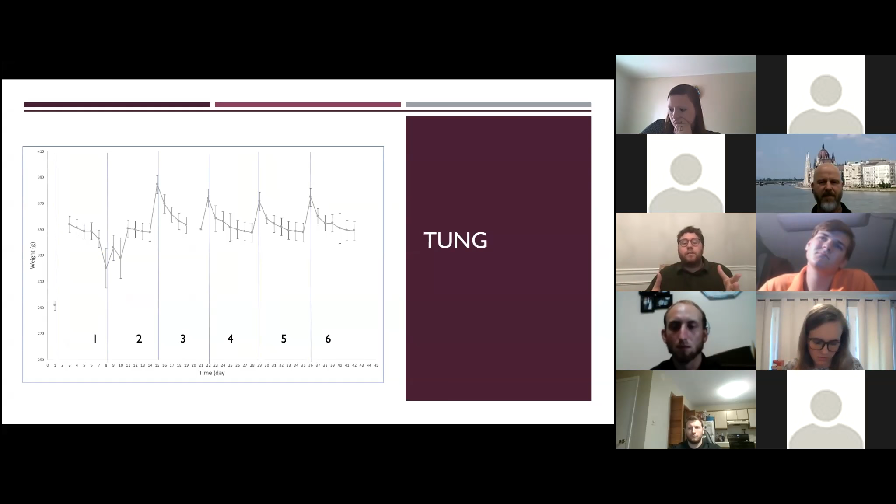So for tung oil, it worked a little bit better, but you could see that water was still being retained and naturally being soaked or taken out of the wood. So you wanted to see more of a drastic drop when you looked at these. So unfortunately, tung oil didn't really provide any conclusive evidence that it was the best.

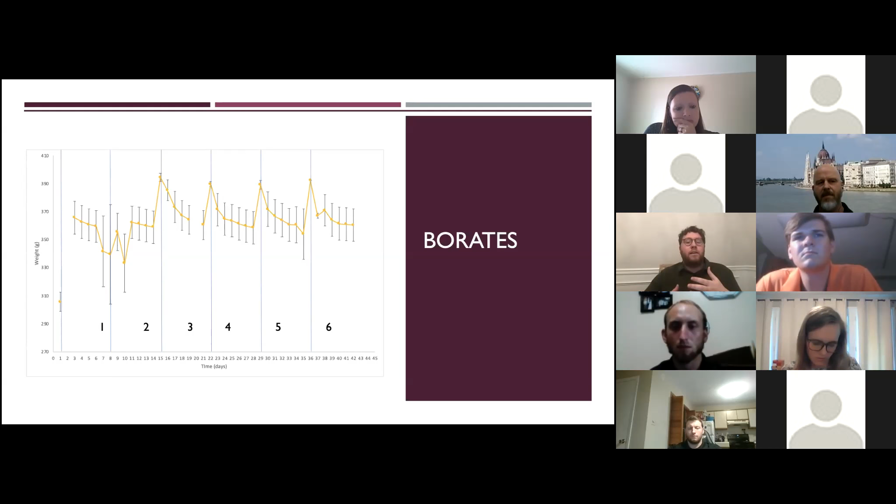Now, when you get to borates, you can see a difference. You can see where the slope starts to drastically decrease after the first and second days and start to level out the rest of the week. That shows that when you drop the rates, it holds the water retention and then it levels out to slow down the equilibrium of the wood. So that's the kind of pattern we're looking for in trying to hold out on the water retention and gain less equilibrium between water and wood.

So what I decided was linseed oil showed drastic results after week 2. We could see that pattern of water being released out of the system and the equilibrium being shifted. And you can also say that clay, tung, and untreated started to just stay consistent the whole entire time, holding that equilibrium and retaining water within their system.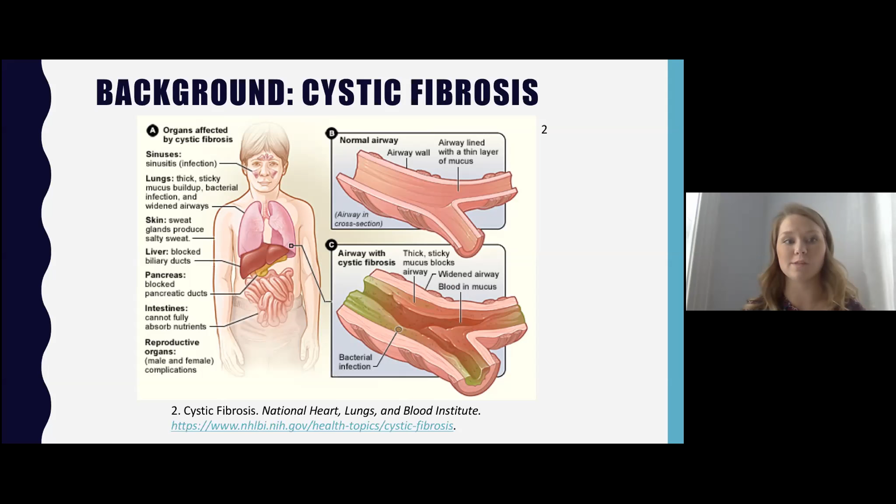For our research, we're going to focus on the lungs. In the lungs, the sticky mucus serves as a breeding ground for infections. The most common bacteria that causes infections in the lungs in patients with cystic fibrosis is called Pseudomonas aeruginosa.

As you can see in the figure, 80% of patients who have bacterial infections in the lungs have a Pseudomonas aeruginosa bacterial infection. Once contracted, CF patients will have this infection for the remainder of their life. There is no cure for it.

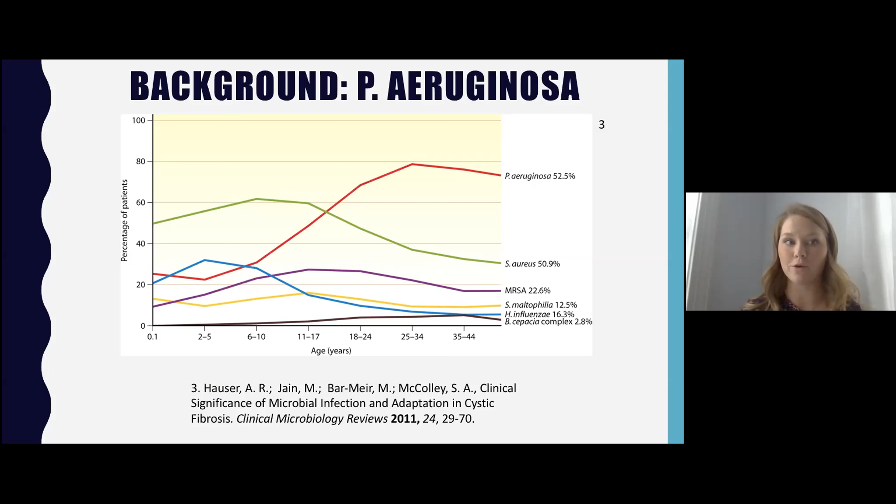If patients have been diagnosed with the Pseudomonas aeruginosa bacterial infection, they will be placed on antibiotics. Today, the two antibiotics used to treat this infection are tobramycin and aztreonam, more commonly known as Cayston. In an attempt to increase the effectiveness of the antibiotics available to them, physicians will more than likely implement a plan where the patient spends 1 month on tobramycin and 1 month on Cayston.

They do this because when bacteria is exposed to antibiotics for an extended period of time, we begin to develop what we call antibiotic resistance. Antibiotic resistance is when the bacteria is exposed to the antibiotic so much that it can actually inhibit the effectiveness of how well the antibiotic works.

So this is where our research comes in. Our goal is to try to find more antibiotics that will combat the Pseudomonas aeruginosa bacterial infection to give cystic fibrosis patients more treatment options.

So what our antibiotics are made of is what's called dipeptides. A dipeptide is where there's 2 amino acids put together by a peptide bond. So why dipeptides? Well, first off, Pseudomonas aeruginosa is a gram-negative bacteria, meaning there's a negative charge associated on the outside of the bacteria.

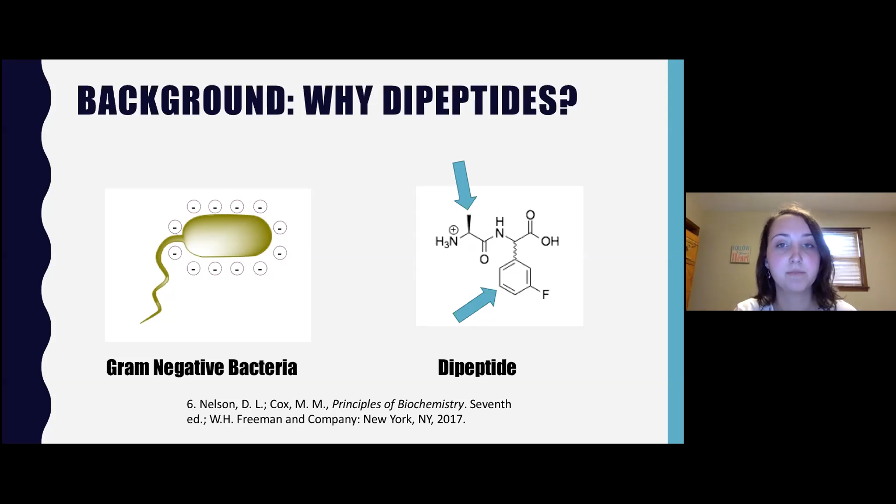So how do we make these dipeptides? Well, our first step was just prepping the resin, and a resin is another word for bead. In solid phase peptide synthesis, a bead is important because it allows us to build up our product very easily.

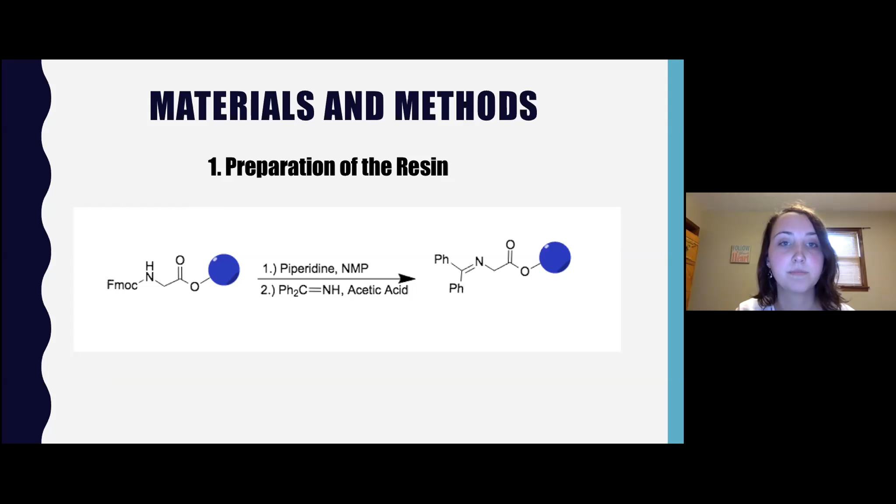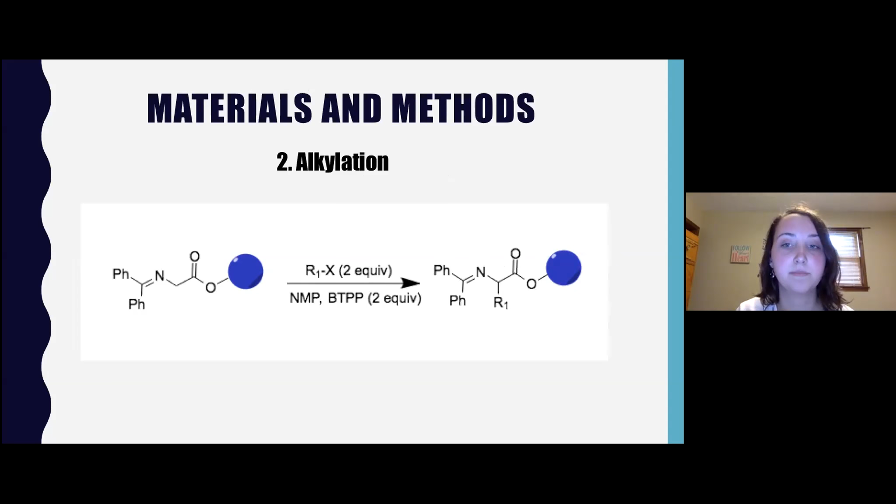And the amino acid that we're adding is called fluorophenylalanine, and we added either 2-fluoro or 3-fluoro. What that means is it just changes the position of the fluoro group on the amino acid. And what this is testing is whether 2-fluoro works better against the bacteria, or 3-fluoro.

And the third step is hydrolysis. So what this basically does, it's going to take the 2 phenyl groups that are represented by the Ph on the left hand side of the arrow. It's going to remove that and replace it with an amino group to prepare for the next step.

So step 4 is what is known as acylation. In this step is where we will attach the second amino acid to make the dipeptide that Hannah had talked about already. As you can see on the left side of the arrow, the R1, which is the first amino acid, and now on the right side, you can see that it has both R1 and R2, making it a true dipeptide.

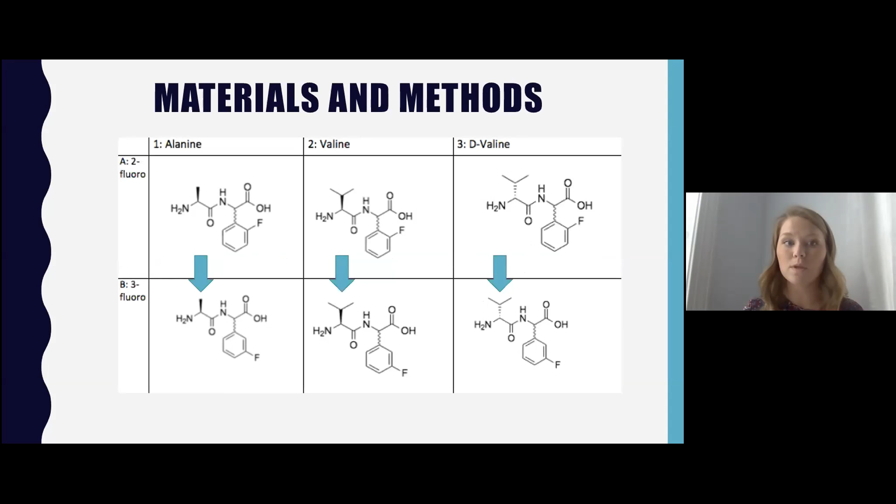So this step is important because it also allows us to alter the stereochemistry. Stereochemistry, for those of you who have not had organic chemistry, has to deal with the 3D structure of a molecule. As you can see in both alanine and valine, there is a solid wedge below the arrow. This means that the molecule is pointing towards you, which makes them both L amino acids.

In D-valine, the molecule has a dashed line, which means that the molecule is pointing away from you, which makes it a D amino acid. So not only are we trying to test the various amino acids, but we're also trying to manipulate them to test and see if their 3D orientation affects how well they fight the Pseudomonas aeruginosa bacteria.

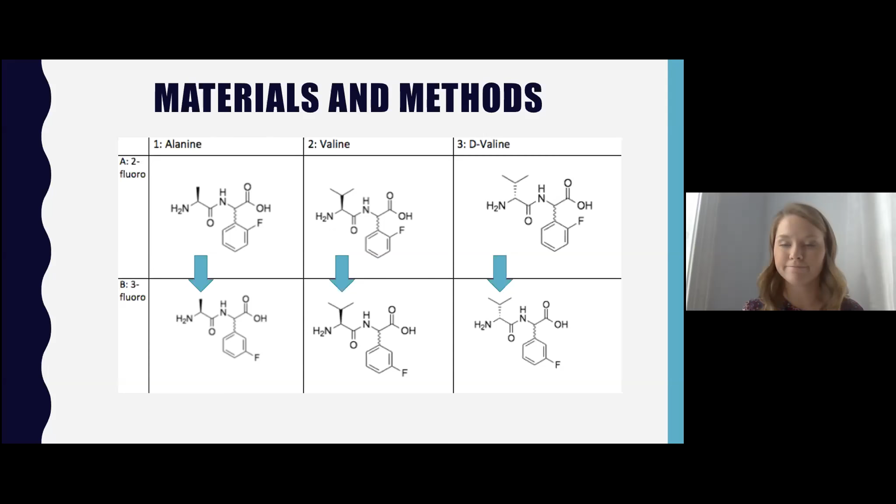So our last step in creating our products is just removing that resin or bead that we talked about earlier, and now our products, our crude products, are ready to be tested.

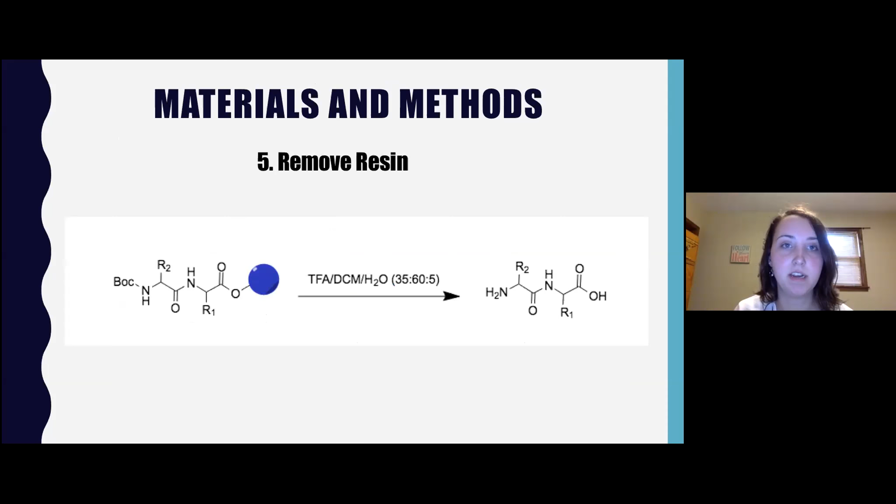So our last step in our experiment is the biofilm assay. What this basically does is we're testing our products, our crude and pure, in the bacteria to see how effective they are. In the F column, you'll see in the very bottom column there are controls, and in F1, it's just the media and there's no bacteria present.

In F2, it has what's called 10% DMSO, and all of our products have this in it. So in this well of F2, it only has 10% DMSO and the bacteria. That means that the growth should not be inhibited at all. And the other controls for F3 and F4, they have tobramycin and aztreonam. And our last control is just 4-fluorophenylalanine.

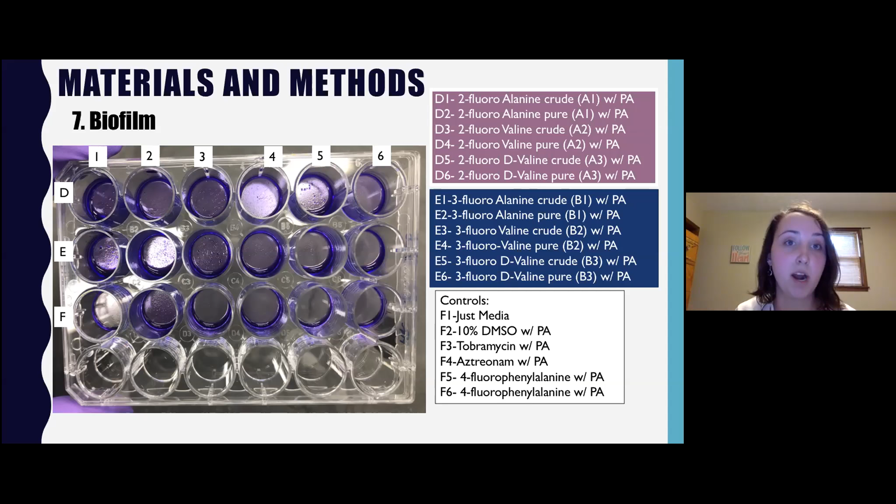To show our results in graph form, I used a UV-vis machine and measured the absorbance in each well, then used an equation to find the concentration of crystal violet. To break down this graph, orange represents our controls, and the 10% DMSO I mentioned earlier should not inhibit any growth of the bacteria. So anything above 10% DMSO concentration did not do well.

In blue, that is alanine, and it did not inhibit the bacteria very well at all. In yellow and pink, you can see below 10% DMSO, they inhibited the bacteria to some extent. The yellow is valine, and the pink is D-valine.

Another important thing to point out is that aztreonam did not inhibit the bacteria as well as D-valine did. That's because normally, when prescribing these antibiotics, aztreonam is given 3 times a day and tobramycin is given twice a day, but in our project we only did 1 dose in a 12-hour period. So that makes a difference.

Also, the last thing I'd like to point out about this graph is that all the rest of our controls had the least amount of crystal violet concentration, meaning they had the least amount of bacteria. So that means we have room to improve our antibiotics.

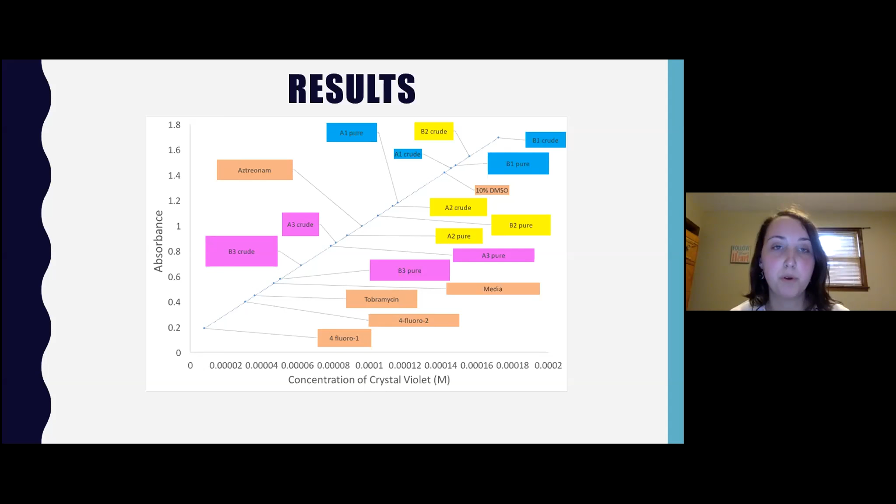As I mentioned before, other schools have also been part of this project, such as Goshen College, Colorado College, IUPUI, and a university in Cuba as well. All the data from each of the different universities is put into one large database, allowing us to create a bigger impact together than we would each individual school working alone.

At Milligan, this project was really started last year by Kelly Guerin and Andy Lamb. Their results showed that D stereoisomers worked better than L stereoisomers, and that 2-fluoro worked better than 4-fluoro. Our results showed that 3-fluoro worked better than 2-fluoro, so we are interested in running more trials to see if these results continue and if we can find a combination of a D stereoisomer and a fluoro position that would work best to inhibit the growth of Pseudomonas aeruginosa.